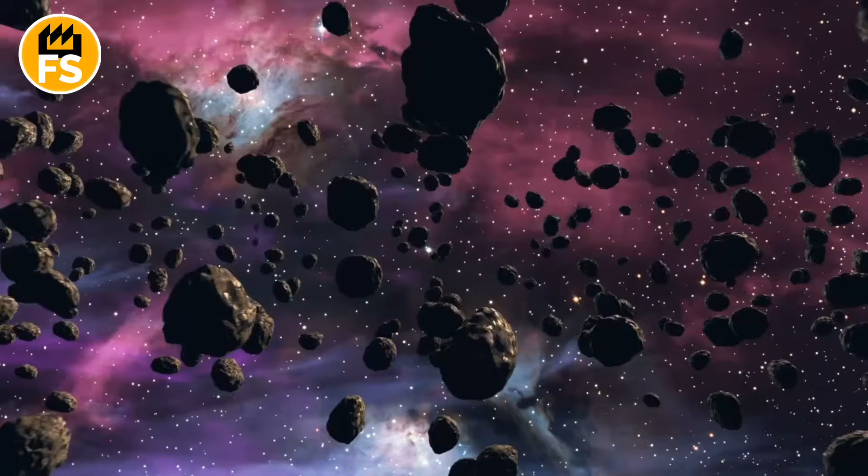Every year, humanity mines nearly 2.5 billion tons of iron ore worldwide. That's over 5 trillion pounds of metal, without which we wouldn't have skyscrapers, roads, or even your smartphone. Iron drives civilization, but few people know where it truly comes from. Because every piece of this metal isn't just ore from a quarry, it's actually a fragment of an ancient star's explosion. And today, you're going to learn something most people don't even suspect.

Stick around till the end. There's a hidden answer there that will completely change how you think about iron.

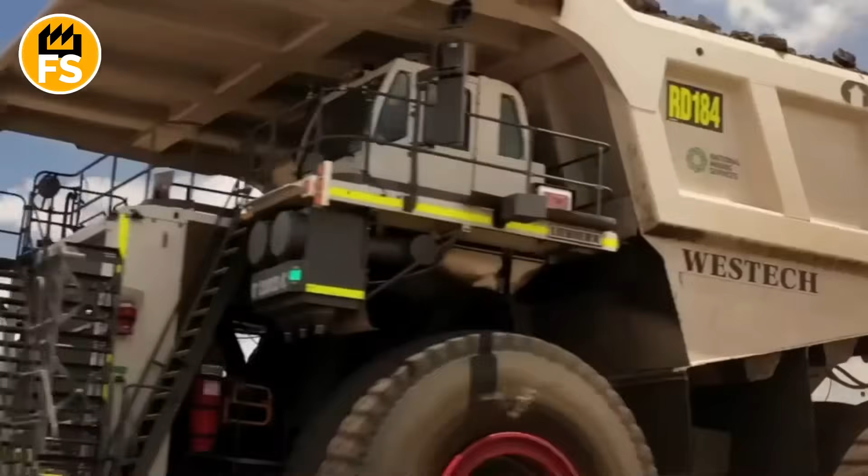The global iron production is an incredibly massive process that drives industrial development and shapes the modern world. Every year, the world extracts nearly 2.5 billion tons of iron ore, or more than 5 trillion pounds. This ore is the primary raw material for steel, without which we couldn't imagine building skyscrapers, cars, bridges, or even modern machinery. The leading iron ore producers are China, Australia, and Brazil.

Australia, for example, mines more than 900 million tons per year, which is roughly 2 trillion pounds, making it the world's largest ore exporter. China, while producing significant amounts of its own ore, is also its biggest consumer, using nearly 1,200 million tons annually for steel production.

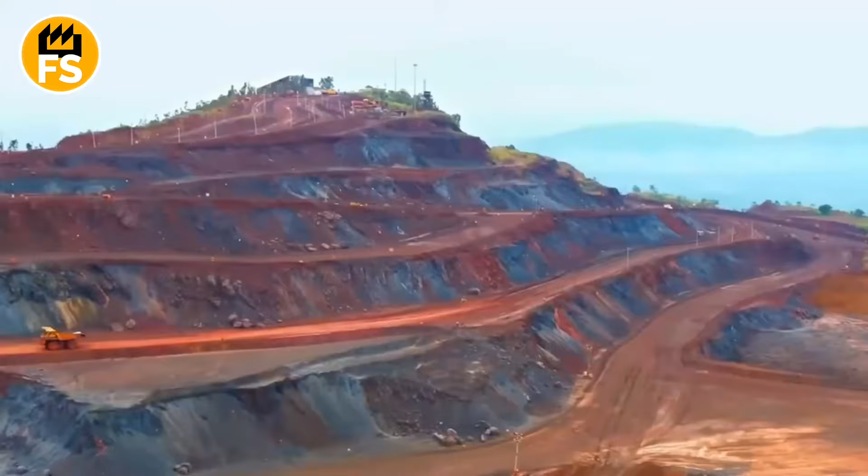Iron ore mining involves massive quarries where giant trucks haul hundreds of tons of ore in a single trip. For example, one modern Australian mining truck can carry over 400 tons of ore at once. That's equivalent to the weight of more than 270 average cars.

The global iron industry keeps pushing forward. Thanks to innovations in extraction technology and reduced energy consumption, production is becoming more efficient and environmentally friendly. Take the United States, for instance. They're implementing new systems to cut carbon emissions in steelmaking, gradually transforming traditional approaches to the industry.

Iron demand is skyrocketing worldwide, especially in developing nations where they're building roads, railways, and massive infrastructure projects at breakneck speed. Simply put, iron is the real engine driving global development, and its production is a powerful indicator of economic strength.

The iron we pull from the Earth's crust has cosmic origins. It was formed in the distant past, long before our planet even existed. Most of the iron in the universe was born in the hearts of ancient stars through processes called nuclear fusion. When a massive star reached the end of its life cycle, it exploded as a supernova, blasting heavy elements, including iron, out into space.

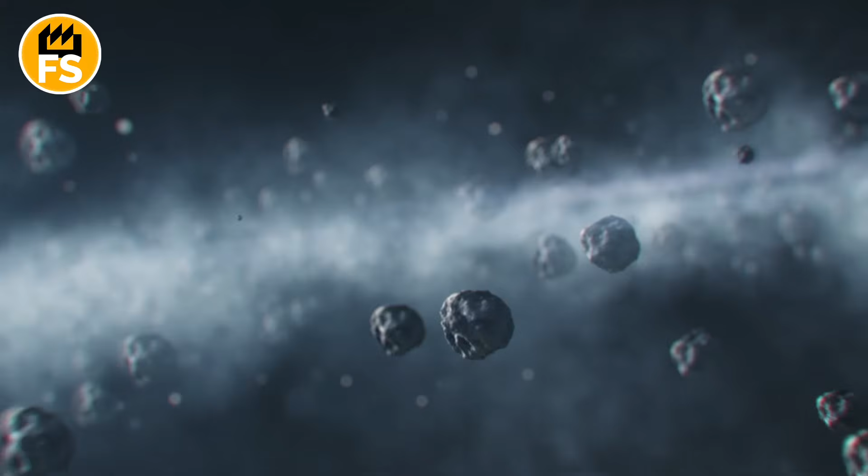This cosmic dust and gas gradually came together over time, forming molecular clouds that eventually compressed into protoplanetary disks. Earth's iron is what remains of these ancient stellar explosions, preserved and woven into the very fabric of our planet. That's why iron is one of the most abundant metals on Earth.

During Earth's formation, over 4.5 billion years ago, the early planet was molten due to intense gravitational compression and frequent meteorite impacts. During this period, heavier elements, including iron, sank towards the center, forming the planet's core. Today, it makes up roughly 1/3 of Earth's total mass, and that's exactly why our planet has its unique magnetic field. The iron core powers this protective shield.

Iron in the upper layers of the planet forms mainly as iron ore, a mixture containing oxides and other iron compounds. It's distributed throughout Earth's crust and mantle, and that's where we extract it from to create metal for every aspect of our lives.

From iron's origins in stars to its crucial role in shaping our planet, this metal has traveled an incredible journey before becoming part of buildings, machines, and even your smartphone. So every piece of iron in the world is essentially a cosmic artifact, carrying within it the history of the universe and our planet's shared story.

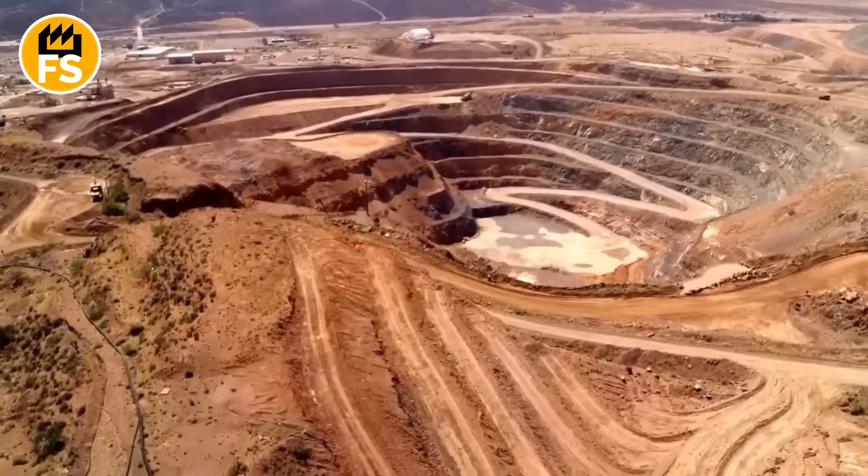Iron almost never occurs in pure form in Earth's crust. It's hidden within numerous minerals, oxides, sulfides, silicates, carbonates, and other compounds. The most common iron minerals are hematite, magnetite, siderite, limonite, and pyrite. The iron content in these ores ranges from 10 to 70% or more, depending on the type and quality of the ore.

To get metallic iron, you need a pretty aggressive and complex technological approach. In industry, the main method is the blast furnace process, where iron ore gets heated in a blast furnace at extremely high temperatures, around 2,900 degrees Fahrenheit. There, under the action of coal and other additives, the ore is reduced, meaning oxygen is separated from the iron, and molten metallic iron forms, which collects at the bottom of the furnace.

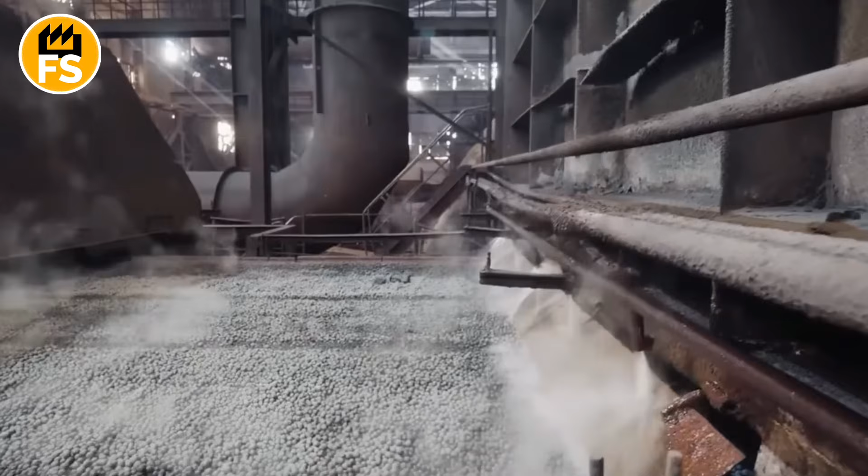Other methods, like direct reduction of iron, are used to extract metal from finer concentrates in the form of iron powder or sponge iron, which can then be remelted.

So, iron gets freed from minerals through engineering processes that demand extreme temperatures and chemical reactions. This aggressive approach is what transforms the iron buried in ores into strong metal, the foundation of modern civilization. The molten metal pools at the bottom of the furnace, separating from the slag, impurities that float to the surface. Pig iron typically contains 3 to 5% carbon and other impurities, so it needs further processing.

The next stage is the converter process. Here, molten pig iron from the blast furnace gets transported to an oxygen converter, where a jet of oxygen further oxidizes excess impurities and carbon. The result is steel with controlled carbon content, maximum 2%, depending on the steel grade.

The molten steel then moves to the casting lines. This is where slabs are formed. Massive flat ingots ranging from about 6 to 12 inches thick and up to several feet wide. A single slab can weigh dozens of tons. These slabs are an intermediate product that's then sent to rolling mills, where they're transformed into flat sheets, strips, or other profiles for future use in manufacturing structures, automobiles, construction rebar, and many other products.

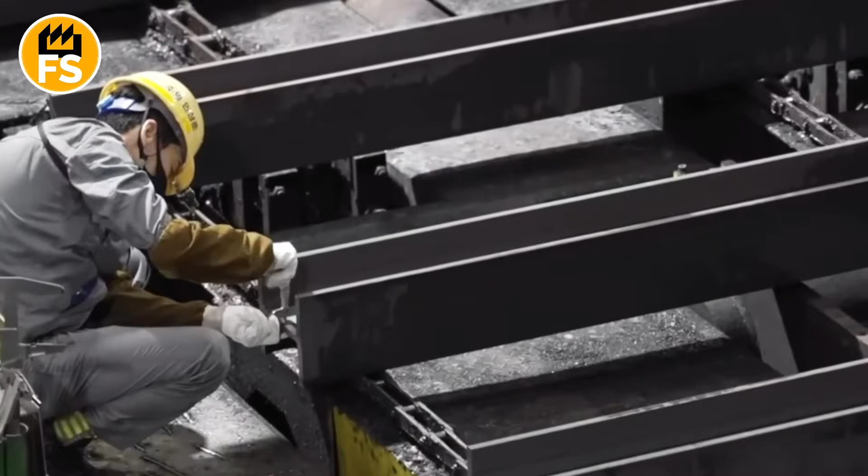It's important to note that this entire technological chain requires high energy intensity and precise control of parameters: temperature, chemical composition, and processing time. Engineers control the process with high precision to achieve the necessary steel quality, strength, and durability.

Besides traditional blast furnace production and converter refining, modern metallurgy increasingly uses electric arc furnaces, where steel scrap is remelted with molten iron, added to save resources and reduce environmental impact. The process starts with loading steel scrap into the furnace, pieces of metal, production waste, or old metal products. To improve steel quality and optimize melting, iron particles or iron concentrates are sometimes added to the scrap metal.

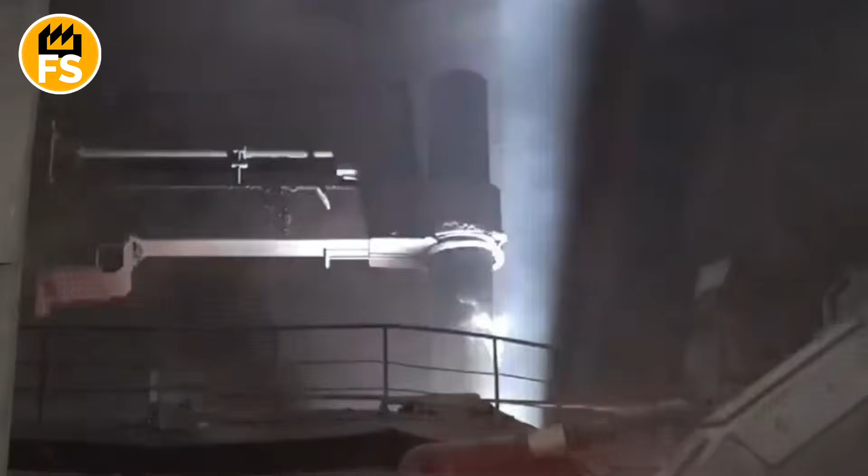After loading, the electrodes lower until they make contact with or get close to the scrap, and current flows through them. An electric arc forms between the electrodes and the charge, reaching temperatures up to 6,300 degrees Fahrenheit. Heating the charge under the arc's influence causes the scrap metal to melt rapidly. The molten steel forms a pool of liquid metal that mixes intensively thanks to electrodynamic vibrations and natural convection. This ensures uniform heating and metal composition.

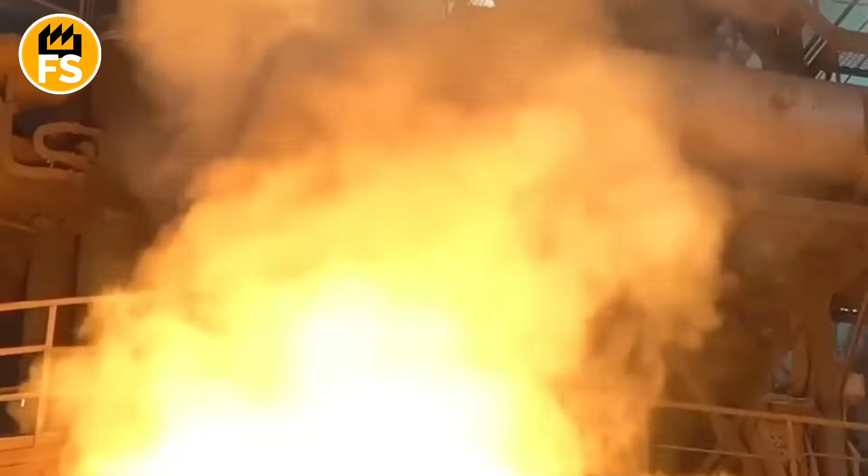To purify the molten steel from unwanted impurities, oxygen is introduced into the furnace through special tuyeres. The oxygen oxidizes carbon, sulfur, phosphorus, and other harmful elements, forming slag that's easily removed. Alongside this, fluxes are added, materials that help neutralize impurities, improve slag formation, and protect the metal from air exposure. Refining continues until the desired chemical composition is achieved.

When the metal reaches the required quality and temperature, it's poured from the electric arc furnace into special ladles, containers for transporting liquid steel to the next processing stages. On continuous casting lines, the molten metal is transformed into slabs. The weight of a single slab can reach anywhere from 20 to 30 tons. These billets serve as the foundation for further rolling into sheets, bars, pipes, and other metal products.

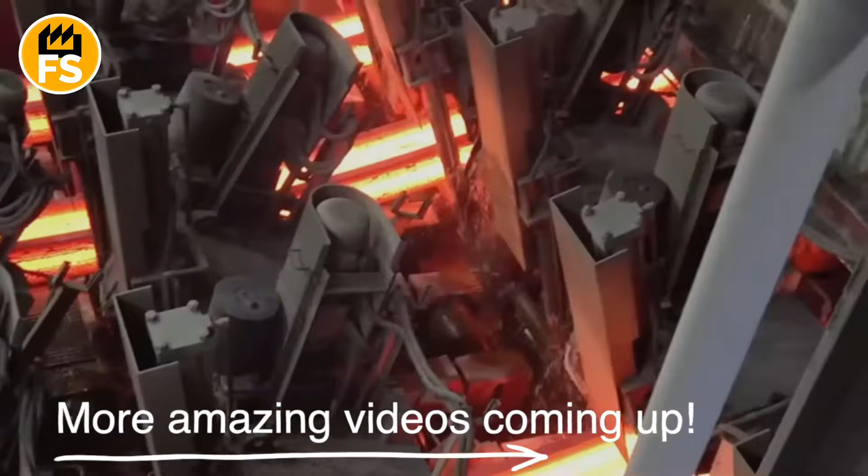The main advantage of electric arc furnaces is that they can run almost entirely on scrap metal, which dramatically cuts down the need for mining iron ore and slashes energy consumption. This makes steel production way more eco-friendly and cost-effective. The furnace is constantly monitored by operators who adjust the current strength, voltage, and oxygen flow to optimize melting and hit the exact steel specs needed. Graphite electrodes wear down over time from the extreme heat and need to be replaced regularly.

Every 3 seconds worldwide, a new engine block rolls off the production line. The heart of a car that will withstand millions of explosions, temperatures over 4,600 degrees, and operate for decades without stopping. But how do you transform molten metal into a perfect mechanism with precision down to a micron? One mistaken dimension, and the engine will tear itself apart within minutes of operation.

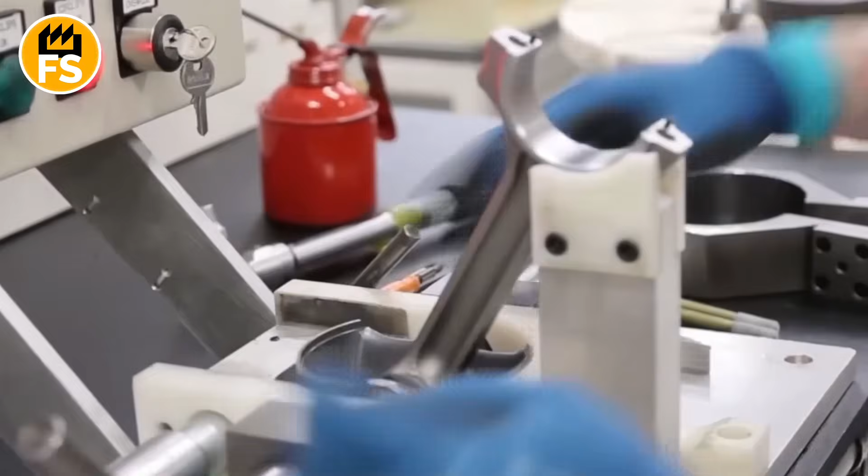Let's start by understanding what an engine block actually is. It's the foundation that holds the entire engine together. Inside it are the cylinders where fuel combustion occurs, pistons that move up and down, and other critical components. The engine block must be strong, lightweight, and resistant to high temperatures. That's why manufacturing it is a complex process that demands precision and advanced technology.

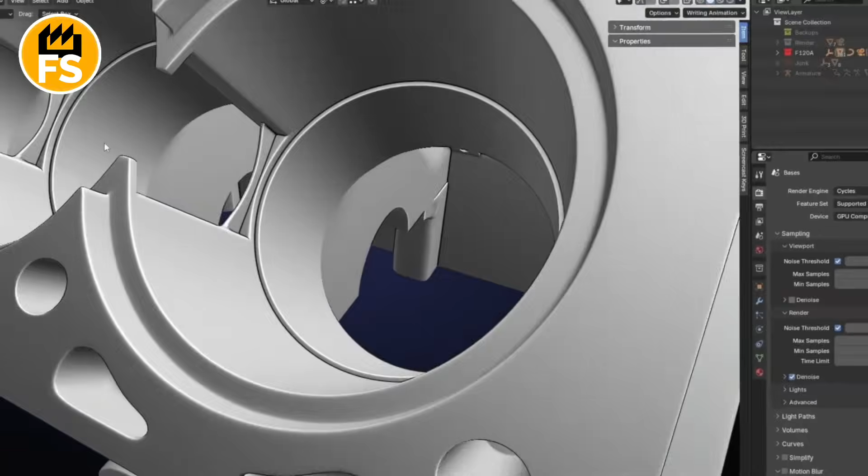Everything begins with an idea. Engineers develop a concept for an engine that must be powerful, economical, and environmentally friendly. They use specialized 3D modeling software to create a digital model of the block. This allows them to account for every detail and test how the engine will perform under various conditions. Engine blocks are made from different materials, but the most common are cast iron and aluminum. Cast iron is strong and resistant to high temperatures, but heavy. Aluminum is lighter and dissipates heat better, but less durable.

Sometimes composite materials or alloys are used to combine the advantages of both metals. After the engineering team completes all calculations, computer modeling, and finally approves the design of the new engine block, the true heart of the future automobile, the most interesting part begins: its birth in metal.

The first and perhaps oldest step in metallurgy is casting. A massive shop filled with the hum of machinery, the smell of molten metal, and the glow of high temperatures. This is the foundry, where engineers' dreams become real components. First, a mold for the block is created. There are two main approaches to creating these molds, each with its own advantages.

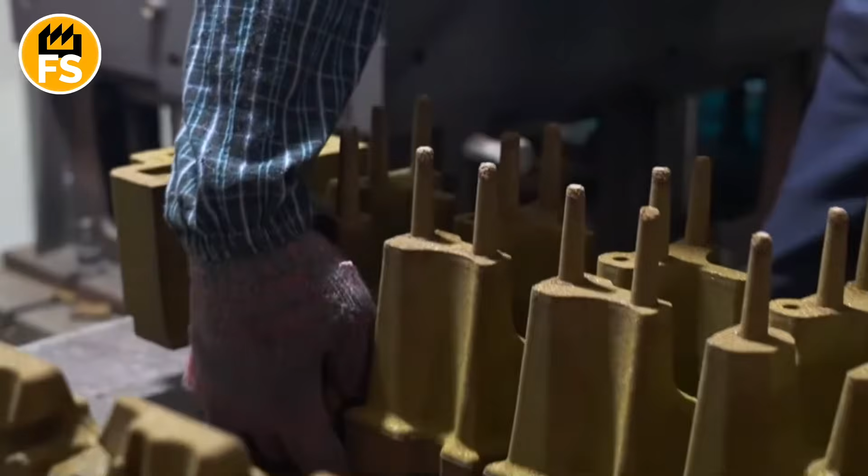The first, and most common for large-scale production, uses sand molds. This is an amazing, though traditional method. First, they make a pattern of the future engine block, usually manufactured from wood or metal, and it's an exact copy of the block, but accounting for certain features, such as compensation for metal shrinkage during cooling.

Then this pattern is placed in a special container, where it's tightly packed with a mixture of quartz sand, clay, and organic binding agents. This mixture is compacted, then baked or chemically hardened, creating a strong but porous mold. After this, the pattern is carefully removed, leaving a cavity that precisely matches the shape of the future block.

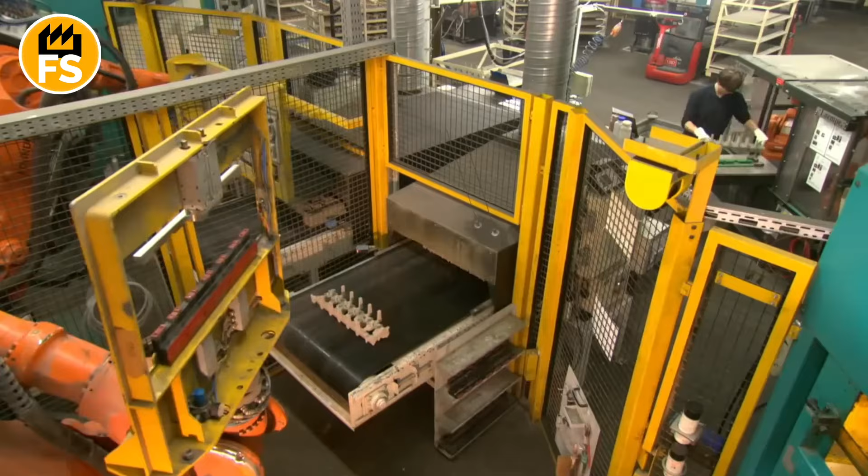The most challenging aspect of sand molds is creating internal cavities, coolant channels, oil passages, cylinder bores. For this, they use so-called cores, separate elements, also made from sand, that are inserted into the mold. After pouring the metal and cooling, the sand is easily removed, leaving the necessary internal channels.

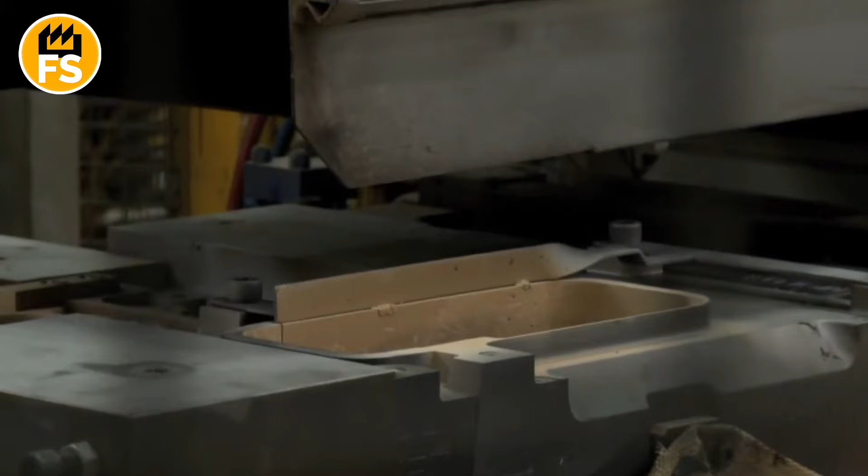The advantage of sand molds is their relative affordability per unit at large volumes and the ability to create very complex internal geometries. The second method, often used for aluminum blocks or smaller production runs, uses metal molds or permanent molds. These are stronger, reusable molds made from steel or cast iron. They're more durable and allow for parts with smoother surfaces and higher dimensional accuracy right from the casting stage.

However, metal molds are much more expensive to manufacture, and it's harder to adapt them for creating the very complex internal channels found in engine blocks. Therefore, they're often combined with sand cores for internal cavities.

This process includes precise control of chemical composition. Metallurgists add special alloying elements, such as silicon, magnesium, copper, in strict accordance with the recipe to give the future block necessary properties: strength, wear resistance, lightness. The molten metal is constantly stirred and goes through refining processes to remove unwanted impurities that could reduce the quality of the finished part.

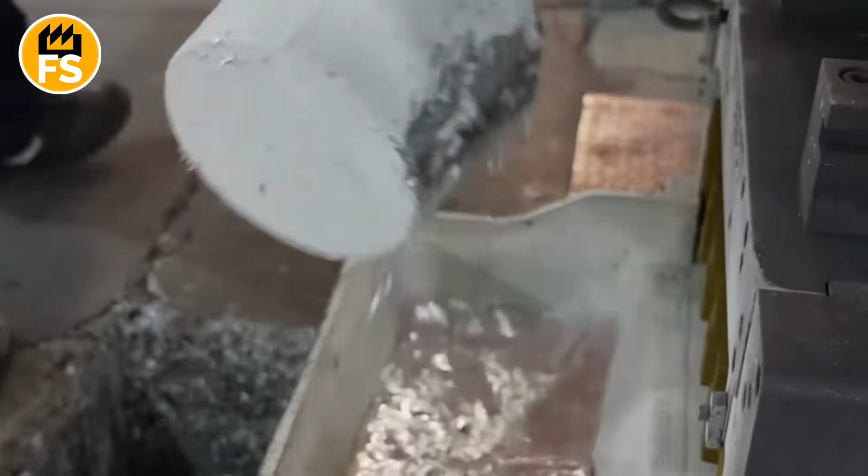Finally, the climax arrives: pouring. The molten metal, radiating intense heat, is carefully transferred from the furnace into special ladles, then into the prepared molds. This is the moment of maximum concentration and precision. The metal must fill every cavity of the mold, displacing air and completely matching its configuration.

The pouring process can be gravitational, meaning the metal simply flows under gravity, or under pressure, which ensures better mold filling and reduces porosity. After pouring, the mold remains for some time, so the metal can cool and solidify. This can take from several minutes to several hours, depending on the block size and metal type.

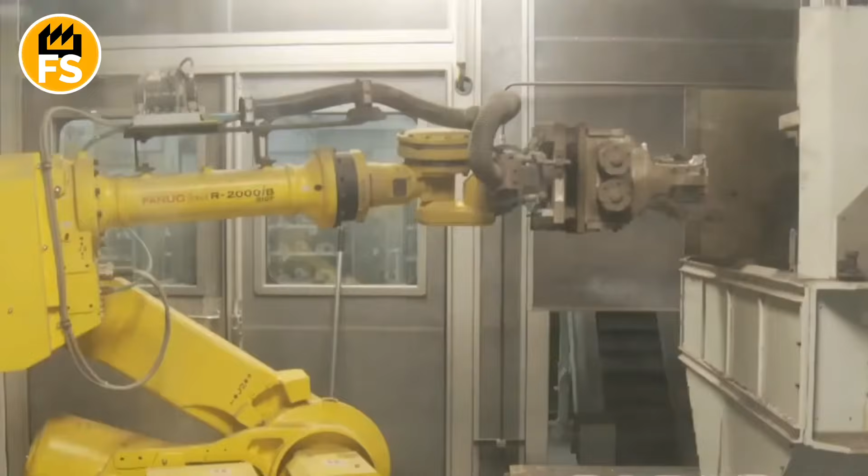When the metal has cooled and fully crystallized, the next stage occurs. The mold is broken apart. If it's a sand mold, it's simply destroyed using vibration or hydraulic hammers, freeing the newly created metal object. The sand is later collected and partially recycled. If it's a metal mold, it's opened and the finished block is carefully extracted.

As a result of this process, we get what's called a rough engine block. It's not perfect yet. Its surface is rough, it may have sand residue or so-called flash, small metal overflows at the mold seams. It doesn't yet have mounting holes and it lacks the micron tolerances required for engine operation.

But it's already a real block, massive and heavy if it's cast iron, or surprisingly light if aluminum, but already with a clearly defined shape, ready for the next processing stages that will transform it into a high-precision part capable of withstanding incredible loads inside the engine.

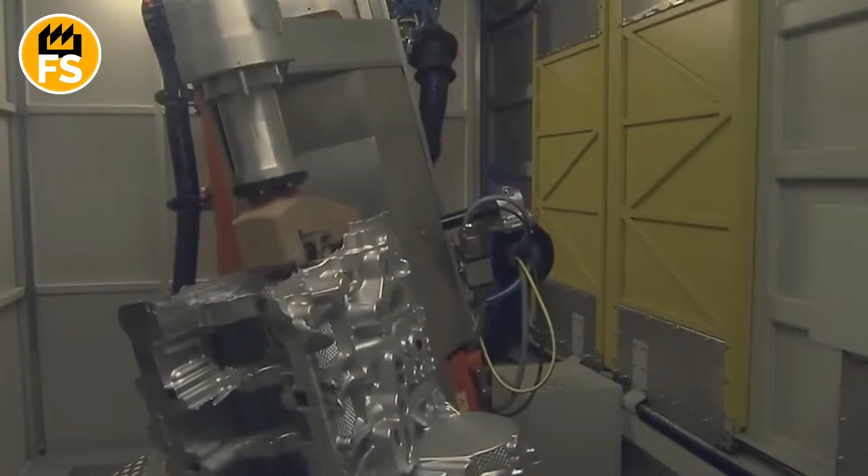Mechanical processing is performed on specialized computer numerically controlled machines. The large, solid block is secured on a special table. Around it, various tools move, performing their work. Like a scene from some movie, isn't it?

Let's start with the most obvious: cylinder bores. These holes must be perfectly round, have precise diameter, and be positioned exactly on one axis, since pistons will move within them. First, machines use large end mills to roughly remove material, creating preliminary holes. It's like carving out a large chunk from cheese.

Then more precise tools come into play. Special boring cutters are used, which carefully remove the thinnest layers of metal, bringing cylinder diameters to the required size. This happens in stages, with constant dimension control.

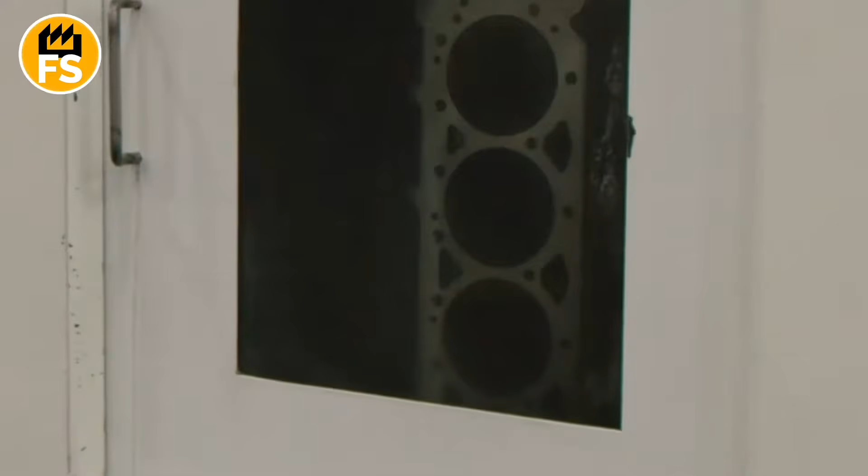After this, cylinder walls undergo honing. This is final abrasive processing that creates very fine, cross-hatched scratches on the internal surface. These scratches retain lubricant, ensuring perfect lubrication of piston rings and minimizing friction, which is critically important for engine efficiency and longevity. Actually, the cylinder surface after this processing feels perfectly smooth to the touch, but under a microscope has the perfect structure for retaining an oil film.

Next, oil and cooling channels. These systems that penetrate the entire block are vitally important. Oil channels deliver lubricant to all moving engine parts, such as the crankshaft, camshaft, pistons, ensuring their lubrication and heat removal. Cooling channels circulate coolant, removing excess heat generated during fuel combustion and maintaining optimal engine operating temperature.

The internal, complex labyrinths of coolant and oil channels, as we mentioned, are formed during the casting stage using sand cores. But after this, they need to be opened and brought to perfect condition. For this, high-precision drills and mills are used to create inlet and outlet openings for these channels, and also connect them with other engine parts. Each hole must be positioned with millimeter, or even micron precision, so fluids can circulate freely.

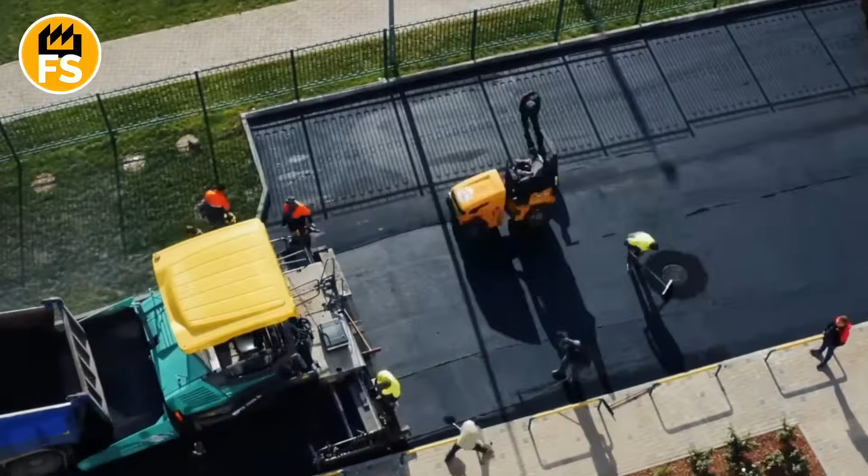In every country, asphalt is just a road. But in Dubai, it's a challenge to nature. Here, air temperatures reach 122 degrees in the shade, while the road surface heats up to 160. Regular asphalt would melt within just a few days, but engineers found a way to make it survive. Polymers that hold their shape even at 176 degrees, geotextile membranes that breathe, and sensors that detect defects before human eyes can spot them. Why don't these roads melt like ice in the sun?

And what strange technology did they test to make them actually dry after rain? Watch till the end. The finale will surprise you.

Standard asphalt consists of stone aggregate and bitumen, a dark, thick substance that holds the mixture together, making it uniform and strong. However, bitumen has one weakness. It starts to soften at temperatures around 113 degrees Fahrenheit. For countries with moderate climates, this isn't a problem since road surfaces rarely reach such heating levels. But Dubai has completely different conditions.

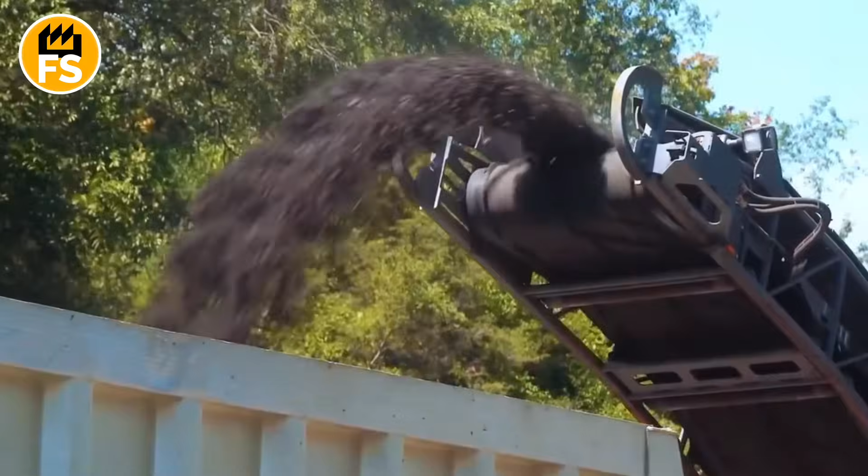There, summer air can heat up to 122 degrees in the shade, while the road surface under direct sunlight can reach 160 degrees. Under such conditions, regular asphalt would literally behave like warm rubber. It would become soft, start deforming under vehicle weight, and in places simply slide off slopes. Plus, sharp temperature changes between scorching days and relatively cool nights would cause cracks to appear.

In countries where occasional short heat waves occur, people might not immediately notice these processes. Sure, we sometimes get 104 degrees in summer, but such temperatures don't last long, and the surface deteriorates slowly, gradually. In Dubai, however, high temperature isn't just present, it's constant and stable for several months. This means asphalt is under continuous stress, and if you don't account for this factor, the road literally won't survive.

That's exactly why engineers had to find a solution that would allow asphalt to maintain its shape even under extreme heating conditions. They replaced regular bitumen with modified bitumen, with polymer additives that change its physical properties. Such bitumen holds its shape at temperatures up to 176 degrees Fahrenheit. This means even when the road surface heats up to maximum levels, the material still remains stable, doesn't flow, and doesn't change structure.

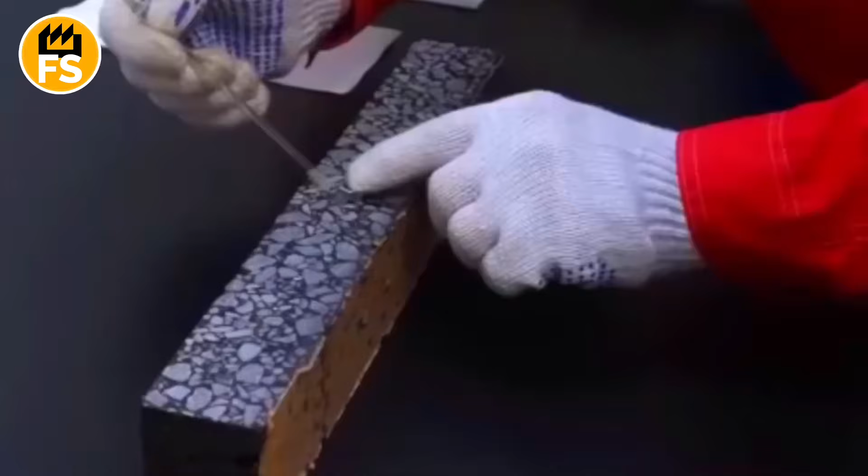The difference might seem small at first glance. What's a few dozen extra degrees? But this exact difference makes Dubai's roads smooth, even, and durable, even when it's almost impossible to breathe from the heat around you. So what is this modified bitumen?

The process is based on mixing bitumen with polymer additives. Polymers act like a reinforcing network at the molecular level. They strengthen the bitumen structure, making it more elastic and heat-resistant. As a result, the asphalt doesn't soften. It maintains stability and shape even when heavy bus or truck wheels press on it for hours.

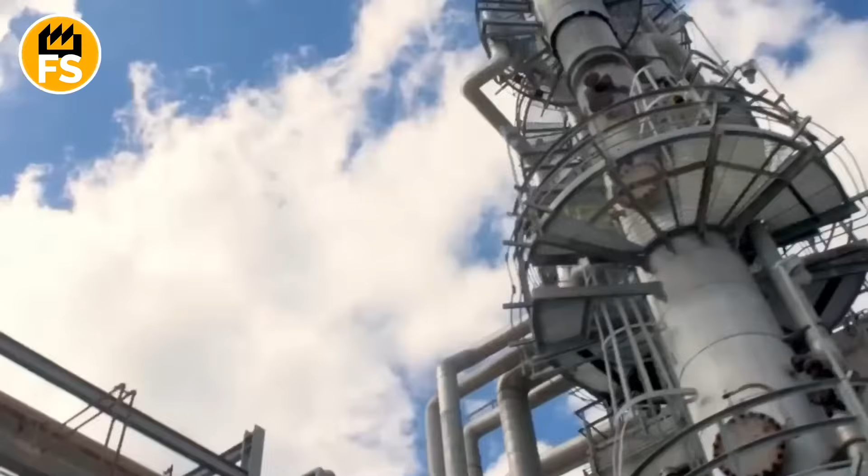The mixing process also isn't limited to just adding polymers. It's crucial to properly select the stone aggregate composition. Stones of different sizes create a framework-like structure, and bitumen here acts not as the main material, but rather as what connects the elements together. If the aggregate is selected incorrectly, bitumen will have to take on too much load, and even the modified mixture will lose stability. Therefore, asphalt composition is always a precise calculation of material ratios that don't just connect, but work as a unified system.

But asphalt is just the surface. Hidden beneath it is a multi-layered sandwich that determines the road's durability. The first layer is sand, but regular sand won't work. It's mobile, can shift, and the road would lose its evenness within months. So sand is stabilized by mixing it with cement or special substances that make the mixture less mobile. Next comes a crushed stone layer that provides hardness and distributes load. Special geotextile fabrics can be laid between layers, preventing settling and material mixing.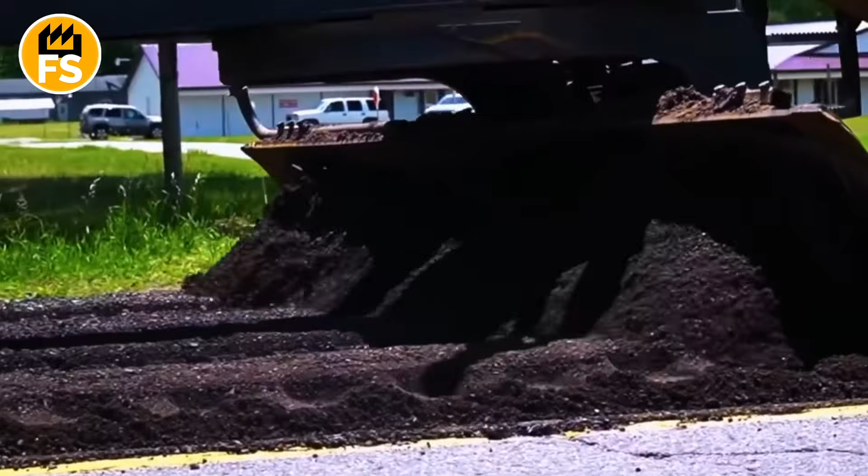Geotextile works as a membrane that allows water to pass through, but doesn't let soil particles mix. This keeps the construction stable for many years. The way asphalt is actually laid also plays an important role. Work is usually done at night when temperatures are lower. This is necessary so bitumen cools evenly and gains the required hardness.

If you lay asphalt during daytime heat, its surface will cool unevenly, creating stress in the structure that will eventually lead to microcracks. After laying, roads are regularly checked using special machines equipped with sensors and thermal imaging cameras. If sections are found where temperature is too high or irregularities appear, they're repaired immediately, not waiting until the problem becomes visible to drivers.

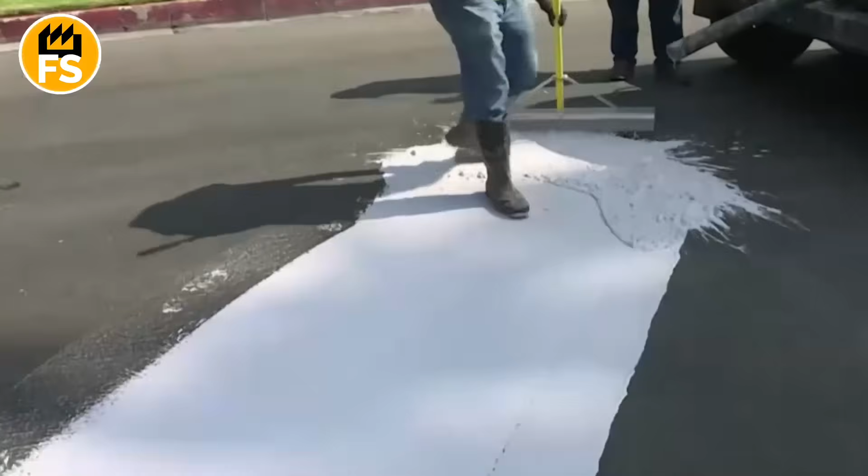Experiments with cooling coatings deserve special mention. In some districts, asphalt is painted or covered with a special compound that reflects sunlight and reduces surface heating by 10 to 15 degrees. This is important in pedestrian areas since road surface temperature affects how hot the air gets at foot level. This way, even a regular walk becomes less exhausting.

In Dubai, roads aren't left unattended until large potholes appear. Control happens constantly and systematically. Special vehicles with measuring equipment travel highways and city streets, recording the smallest irregularities. Sensors read surface deviations, and computers compare them to standards. If there's suspicion of overheating or beginning deformation, the section is checked with thermal imaging cameras.

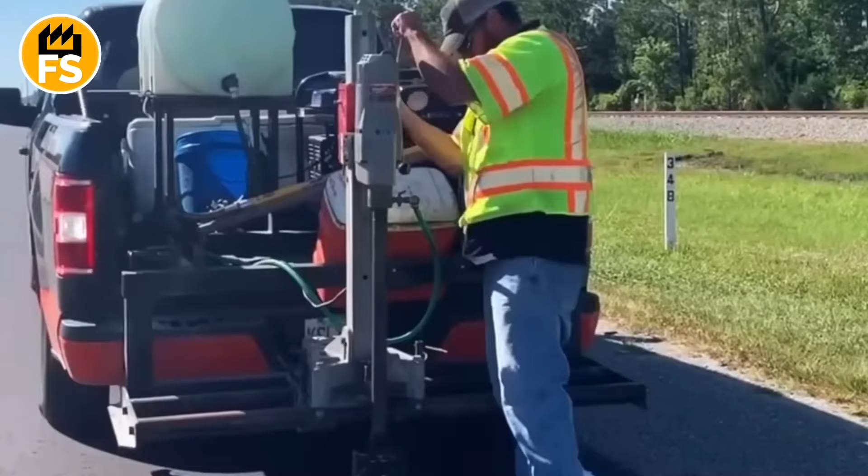High temperature indicates that bitumen is losing rigidity, and the surface might start settling. Thanks to such monitoring, repairs are done not when it's too late, but when the first changes begin. Repair work is conducted mainly at night when temperatures are lower and material cools evenly. This extends the road's service life and avoids repeated damage. The approach is based on the idea that infrastructure should work continuously, not wait for the moment when it becomes a problem for drivers.

According to Dubai municipality data, after switching to polymer-modified mixtures, the number of deformation waves on roads decreased by approximately 40% during the first 2 years. Meanwhile, road surface service life increased on average from 7 to 10 years to 12 to 15 years before the first major repair. This significantly reduces overall infrastructure costs. Although initial polymer asphalt installation costs are higher by approximately 15 to 20%, long-term savings can reach 50% due to reduced repair needs.

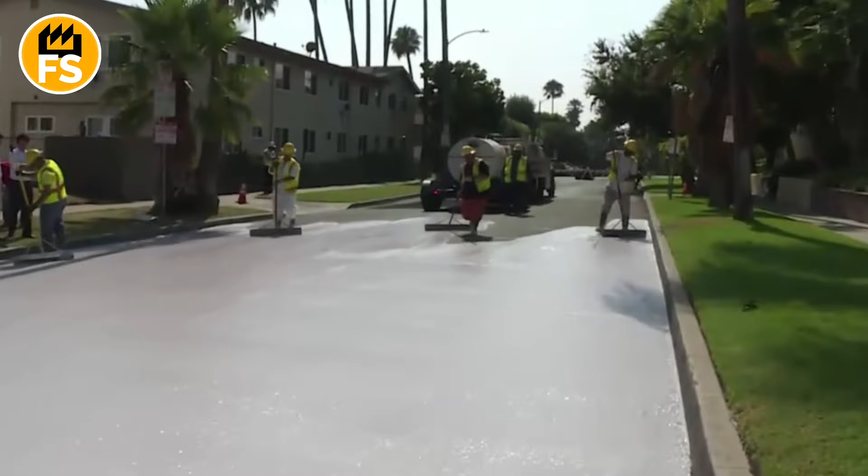There's also data on experimental light reflective coatings being tested in residential areas and near pedestrian zones. On average, such coatings reduce road surface temperature by 10, or even 15 degrees, depending on conditions. According to observations, in areas with cooling roads, air temperature at pedestrian foot level also drops by 2 to 3 degrees, reducing thermal load on people and making outdoor stays more comfortable.

Statistics also show that, with early detection of surface microdefects, their elimination takes on average 3 to 6 hours, while if you wait for visible damage to appear, repairs can last from several days to several weeks and require closing road sections. Therefore, the city focuses on regular monitoring. In 1 month, control vehicles can cover over 80% of the city's road network.

Dubai once tested asphalt that absorbs solar energy, then radiates stored heat at night to dry roads faster after rare rainfall. Turns out, the surface works like a giant thermos. During the day, it accumulates energy, and at night gradually releases it. The experiment showed such roads can dry 30% faster.

And this is really needed, because after desert rain, water doesn't absorb into the ground, but can stand on asphalt for hours or even days. So the technology solves a problem that doesn't even exist in most countries. You know how this experiment ended?

Imagine construction that's not just strong, but super lightweight, durable, and eco-friendly all at once. That's exactly the revolution that fiberglass rebar represents. A modern material that's gradually replacing traditional steel reinforcement in countries around the world. China is especially aggressive in producing it, a giant controlling a massive chunk of the global market.

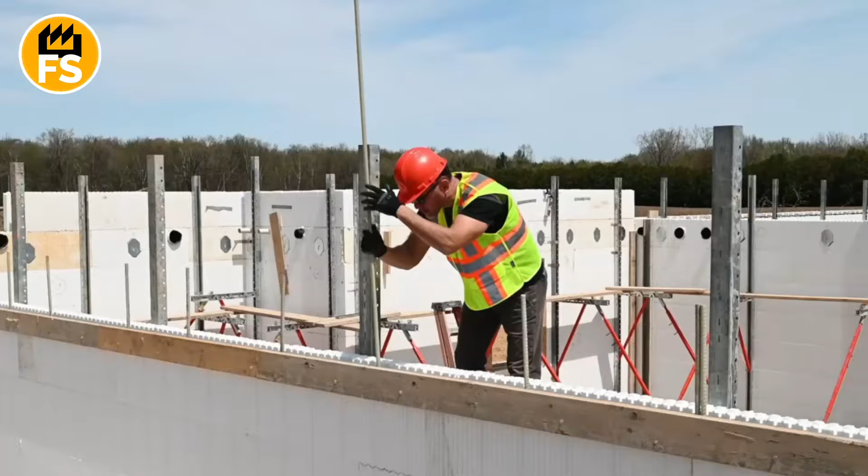But what is this secret material that's changing the game? And why does geopolitics play just as big a role here as technology? Let's dig in. Fiberglass rebar consists of reinforcing rods made from a composite material based on fiberglass soaked in special resins. Unlike traditional steel rebar, it's 4 to 5 times lighter, doesn't rust, resists corrosion, and holds up under harsh conditions. Think acid rain, salt spray, and high humidity.

To put it in perspective, standard steel rebar weighs close to 1 pound per foot of length, while fiberglass rebar weighs about 1/4 pound for the same size. This means it's easier to work with, requires less spending on transportation and installation, which makes construction faster and cheaper. China plays a leading role in global fiberglass rebar production.

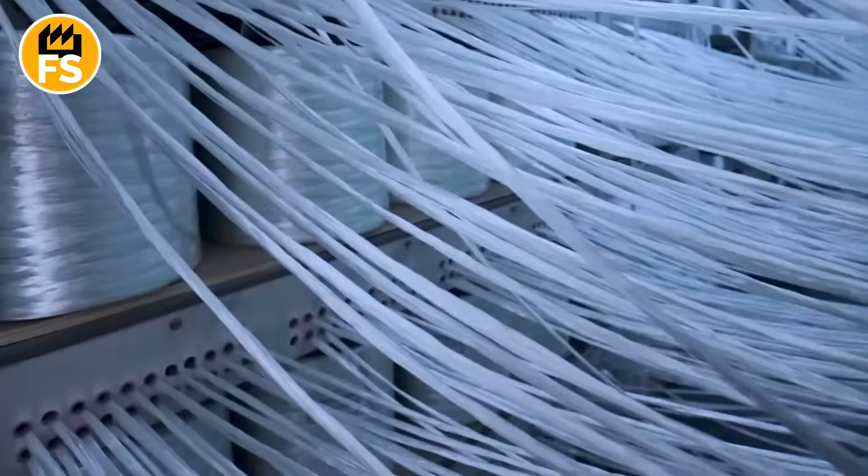Factories, located mainly in the eastern and central regions of the country, are equipped with modern pressing, forming, and fiberglass polymerization lines. Chinese companies produce over 500 million pounds of these materials annually, with exports accounting for roughly 60% of total global volume. China's huge advantage lies not only in scale of production, but in price. Thanks to low electricity and resource costs, Chinese products are often cheaper than competitors from the USA and Europe.

But this is already triggering intense geopolitical discussions. If you look at the bigger picture, fiberglass rebar has become a real hot potato in global trade. Western countries increasingly face a dilemma: support domestic production with significantly higher costs but less export influence from China, or actively import cheap Chinese rebar, becoming dependent on Chinese materials.

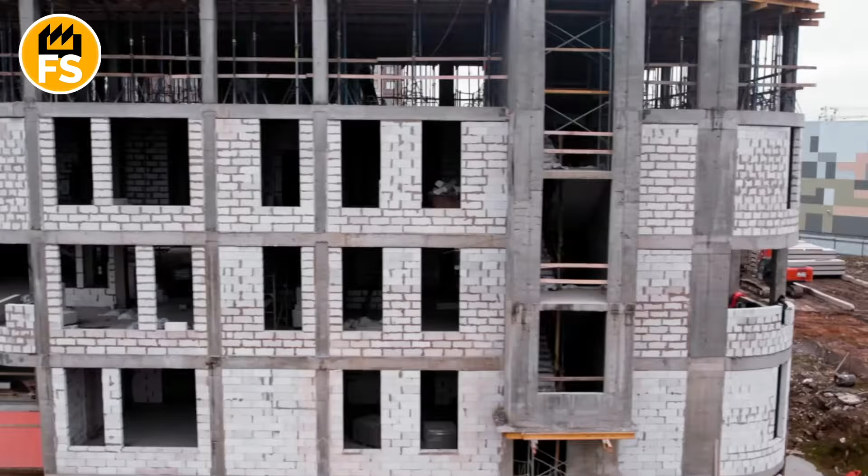The secret aspect is this: China uses fiberglass rebar not only in its own massive infrastructure projects. Through strategic investments in countries across Asia, Africa, and Latin America, Beijing actively promotes this material through its global construction corporations working within the Belt and Road Initiative. This allows China to not only increase its presence in the global construction market, but also strengthen economic influence in regions through control over construction resources.

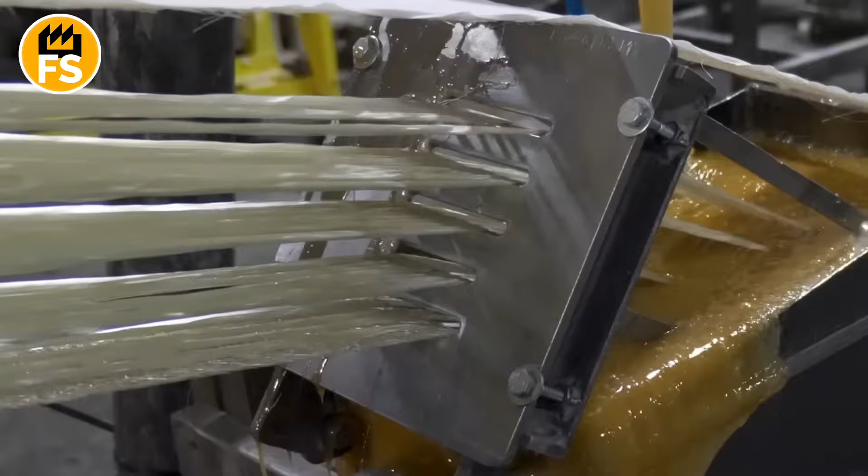The trend of using fiberglass rebar isn't just about savings or new materials. It's about ecology and safety. Fiberglass rebar is rapidly gaining popularity in the USA, where the number of bridges, roads, and buildings constructed using lightweight composites is growing. Unlike metal, this material doesn't corrode, so infrastructure becomes more reliable and durable. According to reports from the American Association of Building Materials, on average, the cost of construction using fiberglass rebar drops by 20%, and the service life of structures doubles. For young engineers, architects, and entrepreneurs, this means more opportunities for innovation, reduced environmental impact, and industry growth.

If you're building a bridge or a high-rise, instead of heavy steel rebar, you use thin fiberglass rods. They can be longer, lighter, and simpler to install. Plus, you don't have to worry that after years, they'll start rusting and causing concrete deterioration.

China is already actively using its fiberglass rebar on huge construction sites. In the capital districts of Beijing, Shanghai, and Guangzhou, they're installing new highways and bridge crossings using these materials. Around the world, Chinese companies supply this rebar for projects in the USA, Europe, and Middle Eastern countries, strengthening their technological and economic presence. Everything starts with glass, the raw material for making fiberglass.

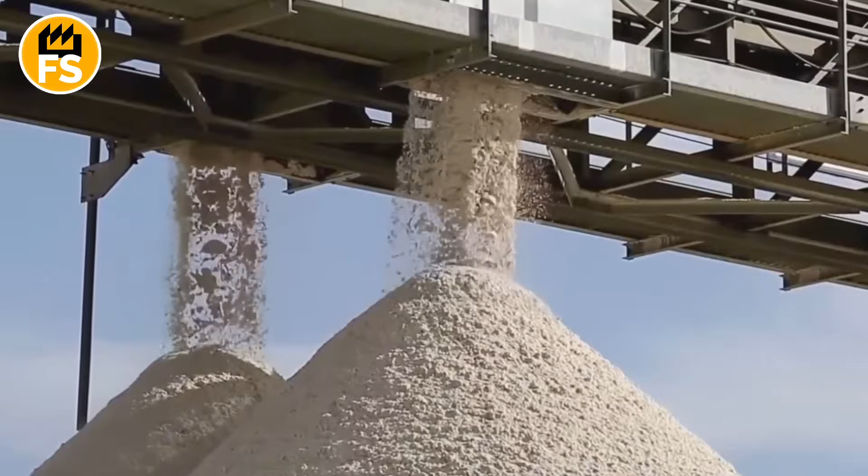Glass is made from a mixture of sand, limestone, and soda. These ingredients are sent to large furnace ovens, heated to temperatures of 2,700 degrees Fahrenheit. Here, the mixture melts, forming liquid glass. Then the molten glass passes through special openings called spinnerets, forming thousands of thin threads. These fibers are cooled and collected into bundles. This creates primary fiberglass: thin, flexible, and strong threads.

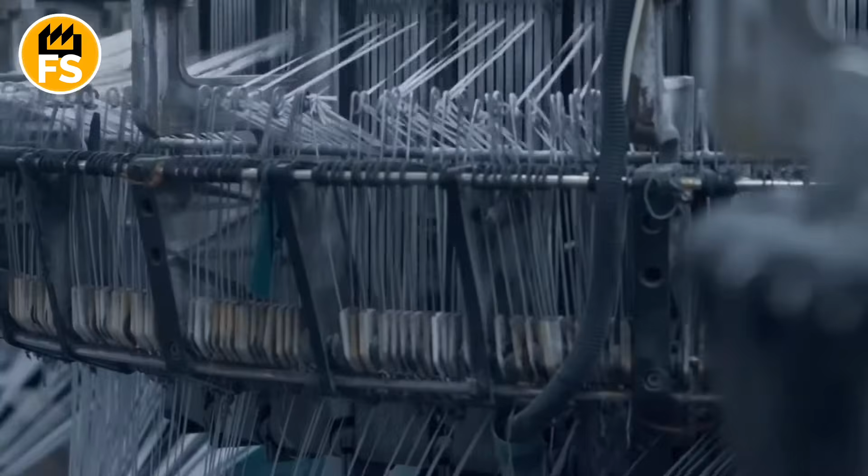To give the fibers necessary properties, they're treated with a special chemical solution, an organic binder or silane. This coating ensures strong adhesion between the fiberglass and the polymer matrix that will follow. The treated threads are collected into bundles that can contain thousands of individual fibers. These fibers are oriented parallel to each other for maximum strength.

Next comes the main stage, forming the composite matrix. The raw material for this is polymer resins, usually epoxy, polyester, or vinyl, which have high strength characteristics and provide resistance to moisture and chemical effects. The fiberglass bundles are dipped or soaked in the polymer resin solution. The fibers are evenly coated with polymer, and excess is removed so there are no lumps and irregularities.

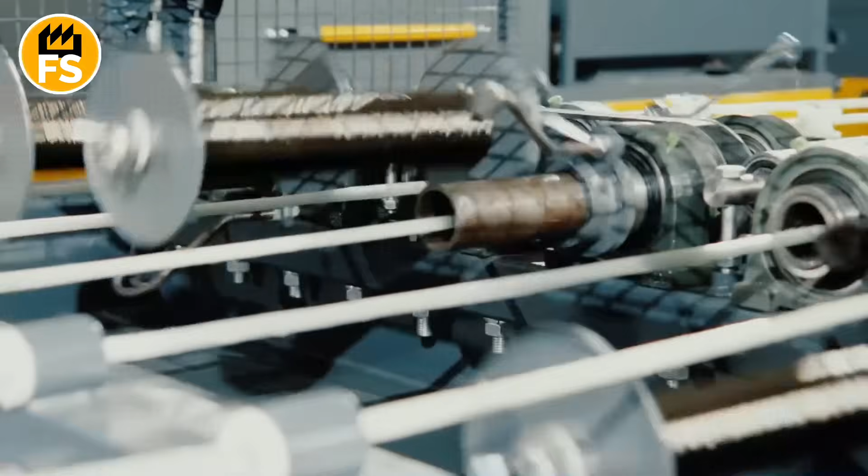The prepared wet bundles are fed into a special forming line, an extruder. Here the molten composition is pushed through forming openings, giving it the shape of a rod or bar of the required diameter. Then comes an important operation: drawing and polymerization. The finished reinforcing rods are immediately sent for cooling and hardening in special thermal chambers. Here, the polymer matrix solidifies, firmly binding the fibers into a single structure.

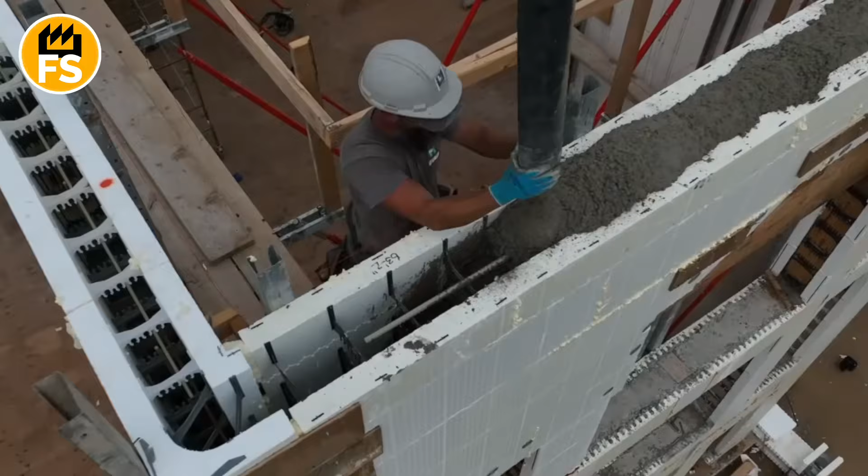Size and shape control is very important, so production lines are equipped with automatic calibration systems to ensure the specified diameter and round shape of the rebar. Standard fiberglass rebar diameter can range from 1/4 inch to 1.5 inches, depending on the application. To ensure better adhesion to concrete, the rebar isn't left completely smooth. During production, an action occurs through forming rollers that creates ribs, notches, or texture on the surface. This makes fiberglass rebar more effective for reinforcing concrete structures. It holds firmly in the concrete mass and doesn't slip under loads.

At the end of the production line, workers or automation cut the reinforcing rods to standard lengths, usually 20 feet or 40 feet. The rods are packed in bundles that are convenient to transport and store. Each batch of products undergoes testing for strength, flexibility, and corrosion resistance. Manufacturers often provide warranties for rebar service life of over 50 years, which is several times longer than the service life of ordinary metal reinforcement. Fiberglass rebar is gaining increasing importance in modern construction thanks to its lightness, strength, and corrosion resistance.

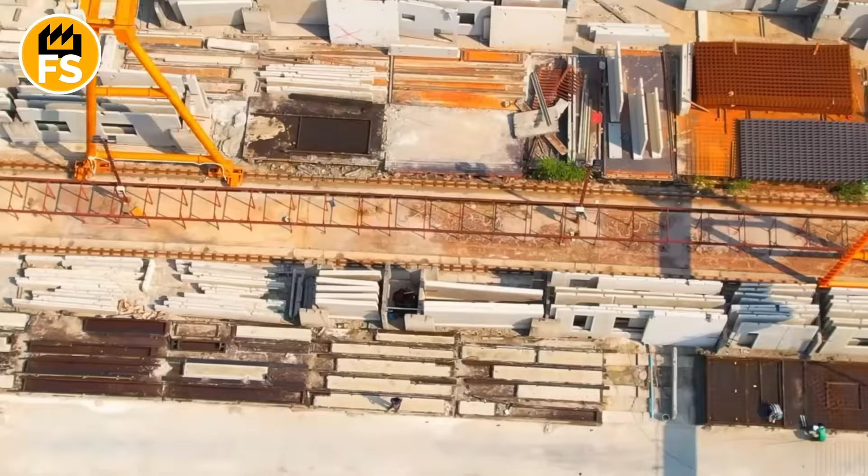Jizan Flood Mitigation Channel, Saudi Arabia, the world's largest project using fiberglass rebar, involving reinforcement of long channels for flood control. Over 11 million meters of fiberglass rebar were used here, designed to ensure high resistance to harsh environments.

Muskrat Falls Hydroelectric Project, Canada. Rebar manufacturers supply material for reinforcement that guarantees a long service life for the hydroelectric station, especially in conditions of contact with water and high humidity.

Sunshine Skyway Rest Area Seawall, USA, Florida. Marine structures where fiberglass rebar is the ideal material due to corrosion resistance in salt water. Here it reduces the need for repairs and extends the service life of the walls.

Alligator River Bridge, USA, North Carolina. A bridge reinforced with composite rebar to increase durability and minimize the weight of metal structures. Canadian Tunnels. Toronto TTC North Subway Extension, a project where fiberglass rebar helps increase structural flexibility and reduce damage risks during seismic movements.

Every year, humanity produces over 360 million tons of plastic. Most of it doesn't disappear. It decomposes over hundreds of years. But what if instead of oil, we could make plastic from sugar? In the very heart of Thailand grows a crop that can change this.

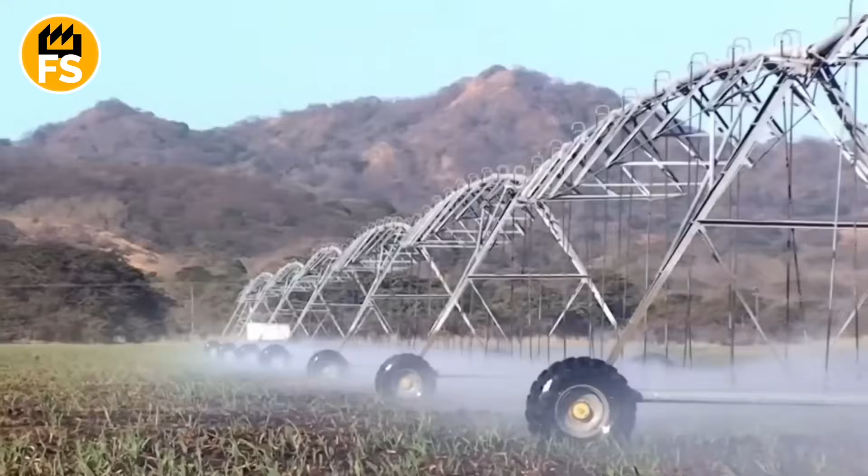Cane isn't grown from seed. It's propagated through cuttings, pieces of stems that have nodes with buds. They're planted in prepared soil, usually in furrows, at a depth of 2 to 4 inches. After a few days, the buds sprout and new shoots begin to form. This plant is very light-loving, so plantations are located in open areas. It needs lots of water, but doesn't like stagnation, so irrigation must be moderate and regular.

Over 10 to 14 months, the cane grows to 7 to 14 feet tall. Its stems are thick, juicy, filled with sweet juice. It's in this juice that sucrose is contained, the basis for sugar production. During growth, the cane actively absorbs carbon from the atmosphere, converting it into organic substances. This makes it not only a source of energy, but also a natural absorber of greenhouse gases.

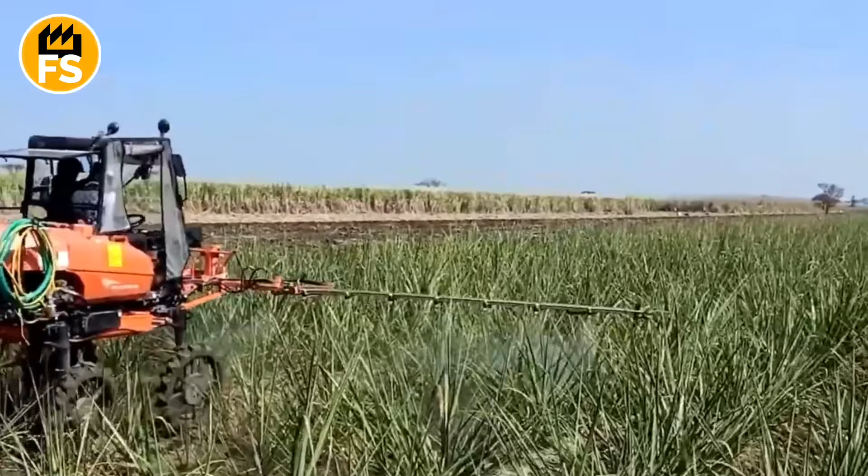Sugarcane is harvested when it reaches maximum sucrose concentration, usually 10 to 14 months after planting. In Thailand, the harvest season falls during the dry period, from December through March, when the plant is no longer growing, but accumulating sweet juice. In many regions of Thailand, manual harvesting is still used. It's hard work performed by experienced workers with machetes.

Before this, the plantation is often burned to remove leaves and ease access to the stems. Although this simplifies the process, burning harms the environment, so more and more farmers are switching to green cane. Harvest without fire. Large farms use mechanized combines that cut, clean, and chop the cane right in the field. This is faster, more efficient, and more ecological, though it requires investment.

Important: cane residues, bagasse, aren't thrown away. They're used as biofuel, fertilizer, or even for making paper. This is an example of circular economy, where nothing is wasted. After harvest, the cane must reach processing as quickly as possible. Otherwise, the sucrose level in the stems begins to drop, and that means quality loss. So logistics here is critically important.

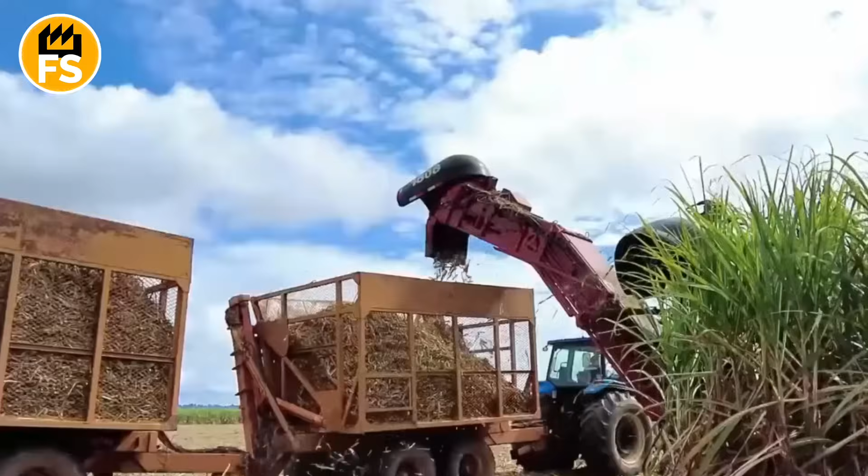Trucks are the most common option in Thailand. Special open platforms or beds with high sides allow transporting large volumes of cane. Buggies or tractors with trailers are often used for short distances, from field to loading point. In some regions where there's appropriate infrastructure, cane is transported by rail cars. This is efficient for large volumes and long distances, but less flexible than motor transport.

Water transport is a rare but possible option in areas with canals or rivers. It's used mainly for export or movement between regions. Cane is often not chopped in the field, but transported in whole stems. They're laid horizontally, densely, to minimize losses. At the factory, chopping, pressing, and juice extraction already occur.

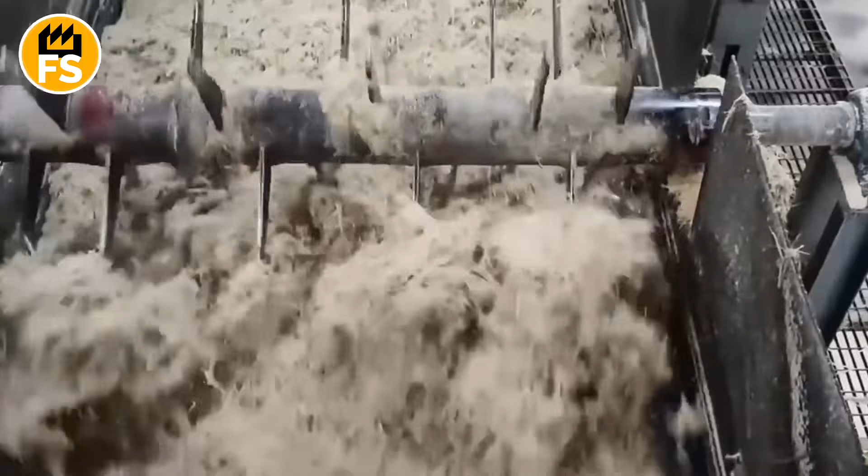Large agricultural enterprises use automated loading systems that speed up the process and reduce losses. In smaller ones, work is still done manually or with simple mechanisms. When trucks with sugarcane arrive at the factory, the technological process begins that transforms the green plant into an innovative material, polylactide. This is a complex but fascinating journey where agricultural biomass becomes part of the ecological future.

Before the cane enters processing, it's checked for sucrose content. Samples are taken from each batch to determine how suitable it is for production. Then the stems are cleaned of leaves and foreign impurities, manually or mechanically. Then our cane needs to be chopped. For this, the stems pass through mechanical crushers. These are large rollers or rotary machines with sharp blades that cut the stems into small fragments. The goal is to maximally open the cellular structure to ease juice extraction.

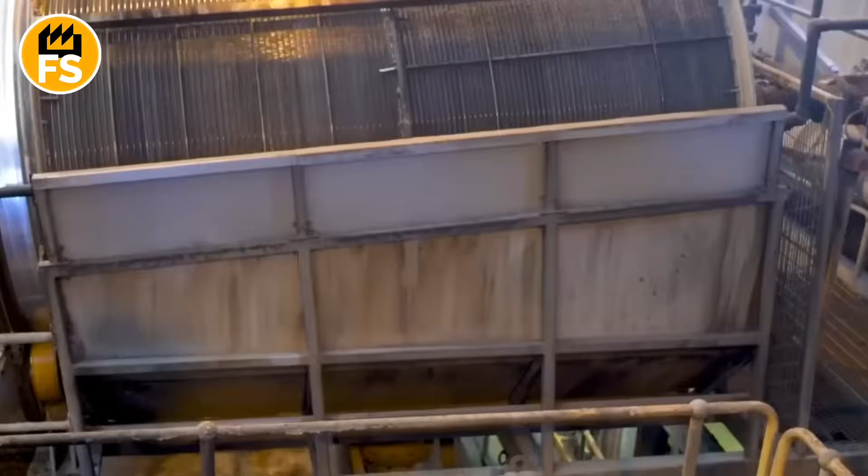The chopped cane is pressed in special rollers. Under high pressure, sweet juice rich in sucrose flows out. This juice is collected in reservoirs. The juice undergoes filtration to remove impurities, and then is heated for concentration. Next, a process similar to brewing kvass or yogurt is launched. Special bacteria are added that transform sugar into lactic acid. It's like when microbes turn grape juice into wine. Only here it's not alcohol that comes out, but acid. This process is called fermentation.

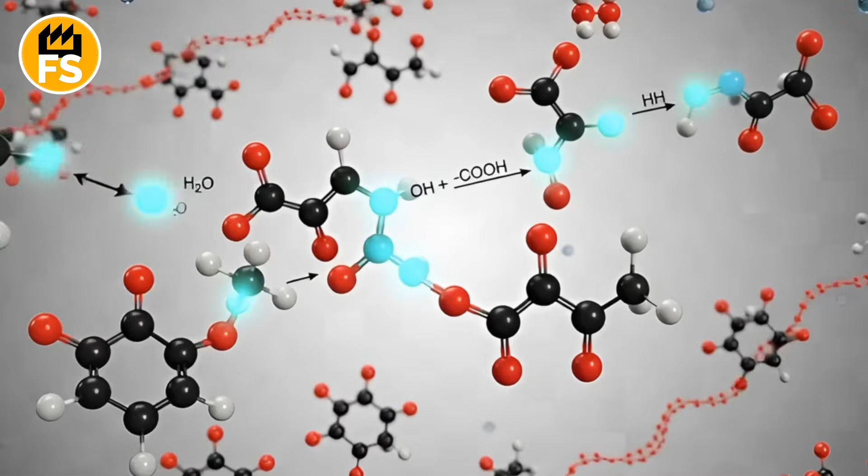It occurs in large tanks, bioreactors. There, everything is controlled: temperature, acidity, how many bacteria are there, so they work properly and don't slack off. Lactic acid is the key ingredient for creating bioplastic. It has properties that allow transforming it into a polymer. The lactic acid is purified and subjected to polymerization, a chemical process in which molecules connect into long chains.

The result is polylactide, a thermoplastic polymer that looks like granules or threads. These granules or threads are the basis for producing packaging, tableware, textiles, 3D printing filaments, and other products. Polylactide has high transparency, strength, and heat resistance, making it an ideal substitute for traditional plastic.

Polylactide granules are poured into special machines, extruders or thermopresses. There, they're heated to the required temperature until they become a viscous mass. The hot mass is passed through forms or dies. For packaging and bags, the extrusion method is used, that is, pulling hot polymer into long ribbons or film. Cups, containers, spoons, and so on are made by filling corresponding forms with polymer under pressure.

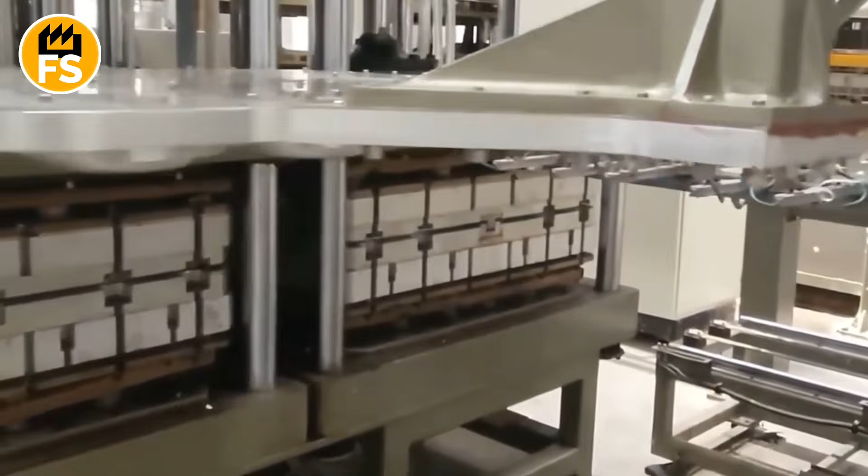To create more complex shapes, like coffee lids, heated film is pressed to the form with a press. As soon as the product is formed, it's quickly cooled, with water, air, or special cooling plates. This is needed so the material hardens and doesn't deform. Finished products are trimmed, polished if needed, checked for quality, and packed for delivery.

Before packing, each product undergoes visual inspection or automatic checking for defects, cracks, deformations, irregularities. In large productions, this is done by robotic systems with cameras and sensors. Defective products are often remelted, since polylactide allows reuse without quality loss. After final cooling, polylactide products, still warm from machine touch, set out on their last journey, to the packing line. Here, everything works smoothly. Mechanical arms carefully stack cups in perfect stacks, 50 in each.

Product groups are wrapped in biodegradable film or cardboard boxes. Packaging can also be made of polylactide. That is, the product and its wrapper are made from the same material, which simplifies recycling. Afterward, labels are applied with information: polylactide type, production date, batch, disposal instructions. Finished boxes with products are stacked on pallets, wrapped with stretch film, which is often also bio, and sent to warehouses or to customers. Storage temperature is room temperature, but without excessive humidity, so polylactide doesn't start decomposing prematurely.

Green packaging is no longer just fashion, but a demand of the times. Videos about plastic harm get millions of views, and brands are looking for alternatives that don't harm the environment. Polylactide from cane is one of the most promising options. After all, cane grows quickly, and the production process doesn't require crazy resources.

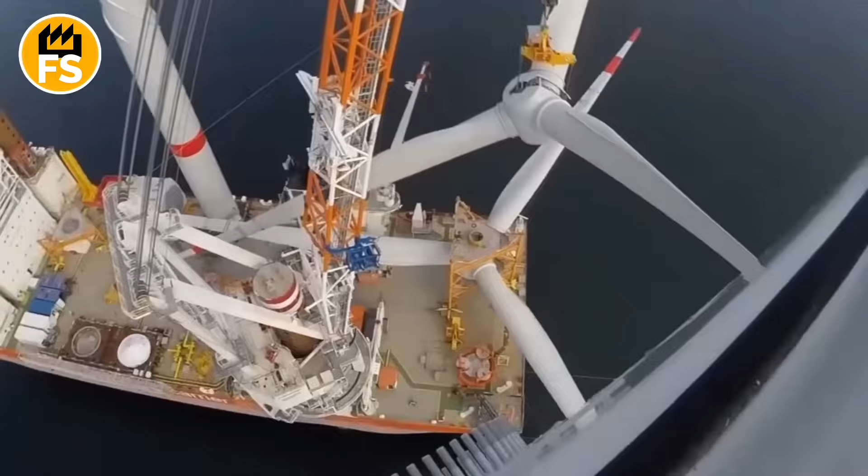Every year, over 80,000 wind turbines are installed worldwide. But few people know that each one hides a true engineering masterpiece inside: a blade over 300 feet long that can withstand hurricane-force winds and operate for decades. How do you create a structure so light it can be lifted by a crane, yet so strong it won't break even at rotational speeds exceeding 180 miles per hour?

From glass and carbon fiber to vacuum resin infusion, the process of manufacturing wind turbine blades resembles precision surgery on a spacecraft scale. Stick around till the end, and you'll discover why these giant wings have become the symbol of a new energy revolution.

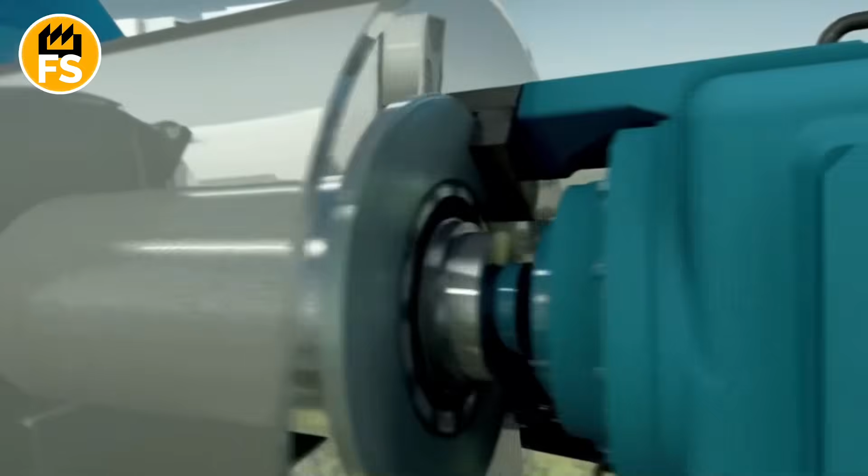Modern megawatt-class turbine blades range from 196 feet to 262 feet in length, and for offshore projects can exceed 360 feet. Why such size? A wind generator's power output is directly proportional to the square of blade length. A longer blade captures a larger wind area, increasing efficiency and consequently, project profitability.

However, with increasing size comes a cubic increase in mass. If you simply scale up a blade, its weight becomes unacceptable and gravitational and inertial loads become destructive. So the key challenge is maintaining low weight with colossal strength.

To solve the weight problem, modern manufacturers have almost completely abandoned traditional metals in favor of advanced composite materials. Fiberglass is the primary material. It's relatively cheap, strong, has excellent fatigue resistance, and provides necessary stiffness. Fiberglass cloth forms the outer shell and most of the internal structure.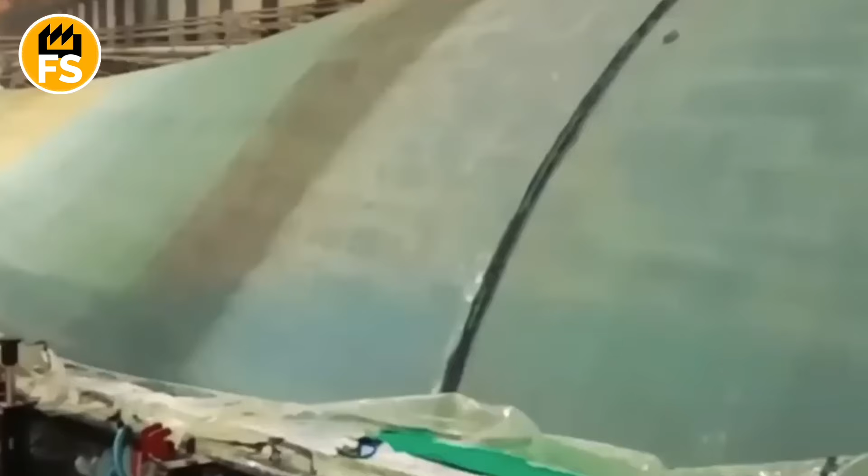For the longest and most powerful blades, carbon fiber is indispensable. It's twice as light and several times stronger than fiberglass. It's strategically used in the most heavily loaded zones, in the longitudinal beams called spar caps that run the entire length of the blade and are responsible for its structural integrity.

The fibers are impregnated with epoxy or polyester resins, which, when cured, bind the fibers into a single, extremely strong monolith. This is the heart of the process. To create sandwich structures that give the blade volume and stiffness at minimum weight, analogous to honeycombs, lightweight core materials are used, such as balsa wood or specialized polymer foams.

Manufacturing a blade is a multi-month process that requires surgical precision, even though it takes place in massive facilities. The first step is creating a giant mold, or matrix. This typically consists of two massive halves made of durable composites or steel. The mold must perfectly replicate the complex aerodynamic profile of the future blade. Profile accuracy is critical for aerodynamic efficiency and noise minimization.

Spar caps are essentially the blade's spine. At this stage, strips of carbon fiber or fiberglass are laid down. If the blade is very large, this process is often fully automated. Robotic systems precisely lay fiber layers into special grooves in the mold. This part is the thickest and bears the main bending loads.

The next step is laying fiberglass layers that form the blade's outer shell, as well as core material blocks. Fibers are typically laid by hand by experienced technicians, or using automated fiber placement to ensure proper fiber orientation that will resist predicted loads.

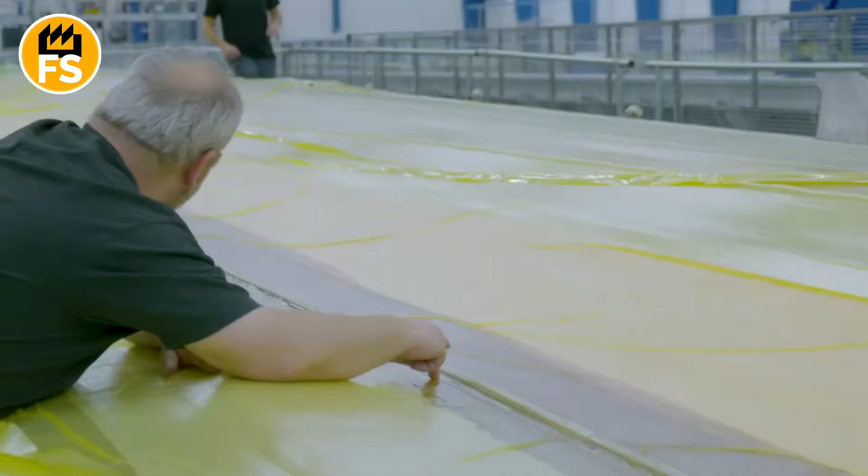After laying all the dry layers, the mold is closed and a deep vacuum is created inside. Resin, epoxy or polyester, is introduced into the mold, and vacuum pressure uniformly and completely impregnates all the fibers, displacing air and ensuring maximum density and strength. This process allows manufacturing large, nearly void-free structures with precisely controlled fiber-to-resin ratios.

The resin-filled blade is placed in special ovens or left in the mold under climate-controlled conditions. Heat initiates the polymerization process, during which liquid resin transforms into a solid, strong polymer. This process is lengthy and requires constant temperature control along the entire blade length to avoid internal stresses. After curing, the blades are removed from the mold.

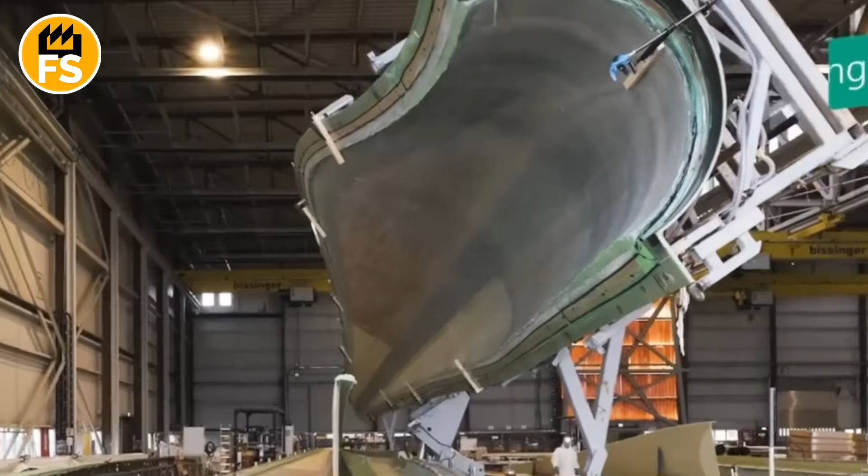The two blade halves, upper and lower, are joined together using special adhesive and additional composite layers. This is one of the most complex stages as it requires perfect alignment over dozens of feet. The root section is where the blade attaches to the turbine nacelle. Powerful steel or composite bushings are embedded here that will withstand enormous loads during rotation and transmit torque.

After assembly, the blade is sanded and then coated with special protective coatings. These coatings, particularly on the leading edge, are vital for protecting composite material from erosion caused by rain, hail, dust, and insects, which act like sandblasting at high blade tip speeds. American manufacturers like GE Renewable Energy and TPI Composites pay special attention to quality and innovation to guarantee blade reliability for 20 or even 25 years of operation.

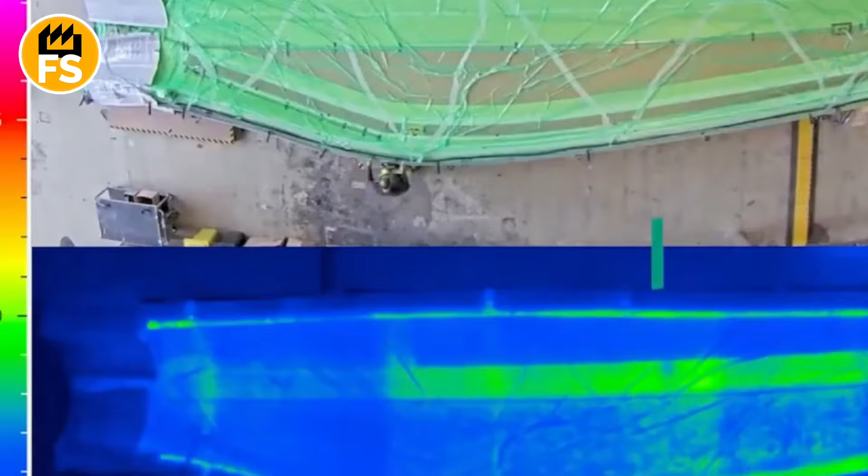No blade leaves the factory without thorough inspection, since internal defects like air pockets or poor resin impregnation can lead to catastrophic failure. Ultrasonic scanning detects internal defects, voids, and composite delamination. Thermography measures thermal signatures to identify areas with varying density, such as defective bonding.

Each new blade model undergoes extreme testing in specialized laboratories. The blade is bent to its strength limit, simulating the strongest wind loads and loads from its own weight to ensure it won't break. Then the blade is forcibly bent forward and backward, up and down millions of times, simulating decades of operation to test material fatigue resistance.

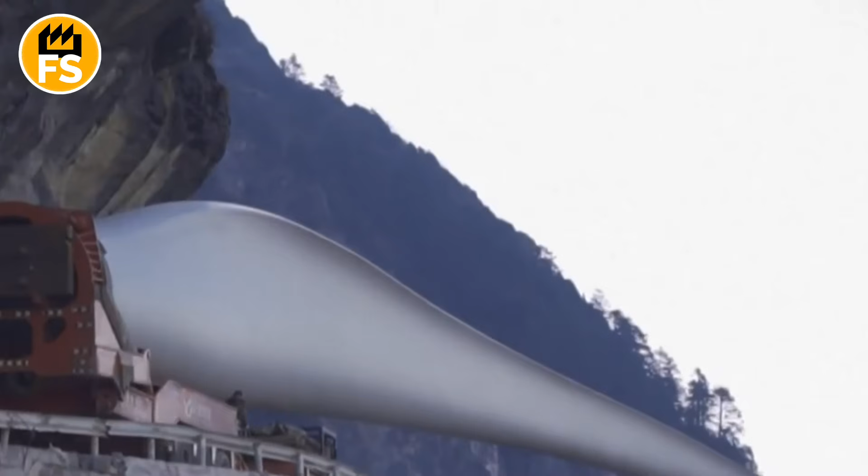After manufacturing comes another engineering challenge: logistics. Transporting a blade over 260 feet from the factory, often located in interior US states, to the installation site requires special low-bed semi-trailers that can rotate the blade around corners and lift it to avoid collisions with infrastructure. It's a unique logistical dance that often requires temporary road closures. Transporting blades is a logistical nightmare. Blade length can easily exceed the wingspan of a Boeing 747.

To transport such structures on US roads, special extended semi-trailers are used that can lift, rotate, and tilt the blade at intersections and in mountains. This requires temporary road closures, removal of road signs, and even traffic lights.

The US continues investing in developing even longer, lighter, and stronger blades, researching thermoplastic materials for better recyclability, and segmented designs to simplify logistics. This ensures that the engineering marvel born in factories will remain a key element in achieving energy security and sustainability.

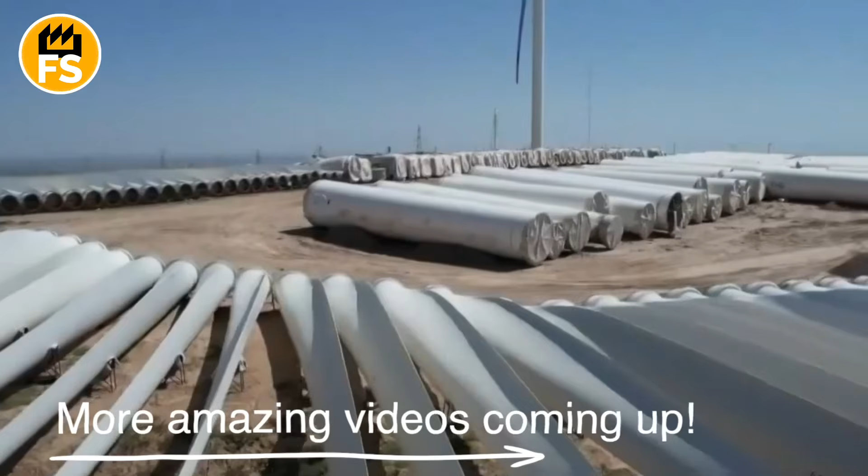Some blades, especially older ones that have already served their term, instead of being recycled, are buried in specialized landfills in sparsely populated states like Wyoming. Due to their volume and composite material, fiberglass that doesn't decompose, they can occupy significant areas, becoming museums of green energy.

The tips of the longest blades can reach rotational speeds of 180 miles per hour. Though they don't exceed the speed of sound, this requires the blade tip to be perfectly designed and protected from erosion. An ordinary raindrop hitting the blade at such speed has destructive force similar to sandblasting. This forces manufacturers to develop high-tech but expensive protective coatings for blade leading edges.

Engineers in the US are developing smart blades that can change their shape or have segmented tips. This allows the turbine to adapt to changing wind speeds and thus increase efficiency and reduce loads.

Every single second, over 100 tons of new trash gets created around the world. Think about it. While you're watching this video, an entire truckload of waste appears on our planet. Where does it all end up? For years, the answer was simple: China. That's where Europe, America, and Japan shipped millions of tons of used bottles, paper, and scrap metal. But one day, China said, "That's enough." And suddenly, the world faced a garbage meltdown.

But here's the mystery. Why would a country that banned importing other people's trash start searching for it just a few years later? Stick around till the end. You'll discover the secret that flipped the global recycling industry upside down.

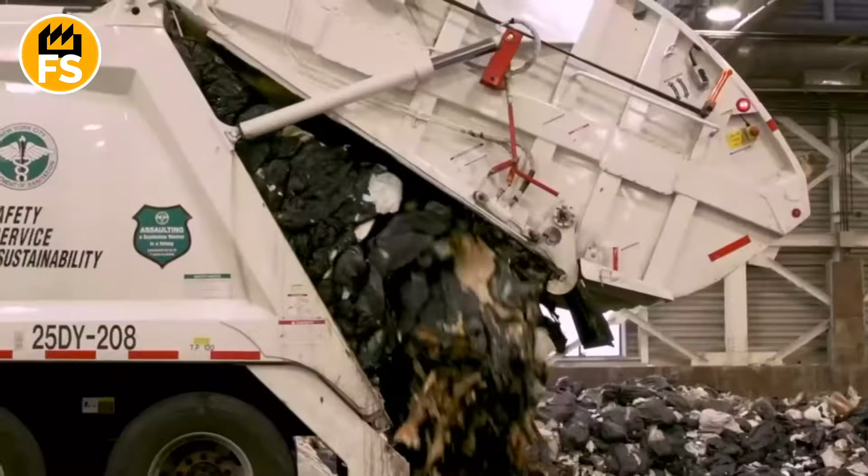For many, many years, the entire world, especially wealthy countries in Europe, America, and Japan, got comfortable with a very convenient setup. They'd collect their trash, old plastic, paper, scrap metal, and simply ship it off to China. Massive container ships sailed across the oceans, loaded with tons of used soda bottles, old newspapers, and broken toys. China was like the world's global trash can. But not just a can. It was also a massive recycling operation.

Chinese factories would take this waste, sort it, process it, and turn it into new products that they'd sell right back around the world. It was incredibly profitable for China. They got cheap raw materials and created jobs. And for other countries, it was perfect. They got rid of their garbage problem for relatively little money. Everybody was happy, right? Well, almost.

But then, around 2018, China said, "Enough." Imagine a huge meeting of Chinese officials where the decision rang out: "We're done accepting other people's trash." They called this policy, very characteristically, National Sword. It was like if your neighbor, whose garage you'd been dumping your junk in for years, suddenly said, "That's it, take it all back. My garage is full and I'm sick of this." And that's when real chaos erupted.

Countries that had been carelessly shipping their waste to China for years suddenly found themselves with millions of tons of garbage with nowhere to go. Picture this. Warehouses across Europe and America started filling up with mountains of plastic and paper that were supposed to sail to China, but now had no destination. It was a genuine shock to their recycling industry. What were they supposed to do with all this trash? Dump it in the Pacific Ocean? Toss it in deserts like in post-apocalyptic movies? Of course not, but the panic was massive.

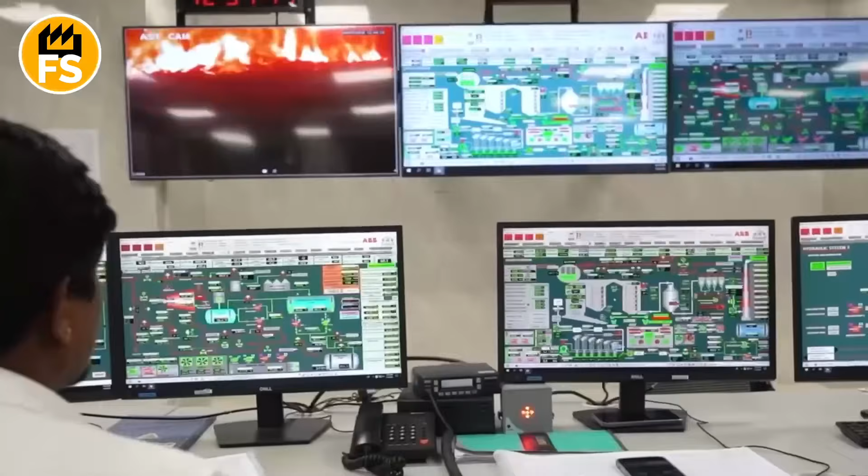Some countries started burning waste in incinerators, which isn't great for the environment since it pollutes the air. Others scrambled to find new trash cans in Southeast Asia, Vietnam, Malaysia, Indonesia. But these countries quickly started pushing back too, because they didn't want to become the world's dumping grounds either.

But here's where it gets really interesting. While the world frantically searched for somewhere to shove their plastic mountains, China started feeling a strange hunger. A hunger for plastic, a hunger for waste paper, a hunger for scrap metal. Seems impossible, right? A country that generates the most trash in the world suddenly experiencing a shortage of it? It's like a millionaire who suddenly went broke and is now searching for loose change under the couch cushions.

The thing is, Chinese industry had gotten hooked on this imported high. Recycling plants, of which there were, to put it mildly, plenty in the Middle Kingdom, had gotten used to working with cheap, abundant, though not always quality, imported waste.

Imagine a huge factory that processes tons of plastic bottles from Germany or the US every day. Its conveyor belts ran non-stop. Its workers knew their job. Its owners counted their profits. And suddenly, bam! The tap of imported raw materials got turned off.

National Sword didn't just cut off imports. It left this entire massive industry without its usual food supply. Factories stood idle, capacity sat unused, and business owners pulled their hair out. But why couldn't they just switch to their own Chinese garbage? After all, there are billions of tons of it, right? That's where the devil's in the details. The problem isn't the absence of trash altogether, but the absence of quality, sorted, clean raw materials.

First, even what gets sorted often doesn't meet the cleanliness standards required for recycling. Imagine a plastic bottle you tossed in the right container, but it was poorly washed and still had yogurt residue inside. Or a pizza box soaked with grease. Things like this, if there are too many of them, can ruin an entire batch of raw materials, making it unsuitable for recycling. Recycling plants that previously worked with more or less standardized imported plastic that had already gone through initial sorting abroad suddenly faced Chinese reality, a mixture that requires additional, expensive cleaning stages, or simply gets rejected.

Second, logistics. Collecting billions of tons of trash is one thing, but collecting it in such a way that it reaches recycling plants as clean, sorted raw materials that can be economically viable to recycle, that's a completely different story. In many areas of China, especially in smaller cities and rural areas, the secondary raw material collection system is still very primitive. There, trash is still collected haphazardly, and sorting often happens right at the dump site, by hand, which hardly guarantees high quality.

But there's another interesting angle here. China is a country that's constantly trying to upgrade itself, to become a leader in everything. And with trash recycling, it's the same story. After National Sword, they decided, okay, if we can't import, we'll build the world's best system ourselves. And they started building, modernizing, investing. New, modern, high-tech recycling plants appeared. They're equipped with the latest equipment, capable of processing massive volumes of secondary raw materials.

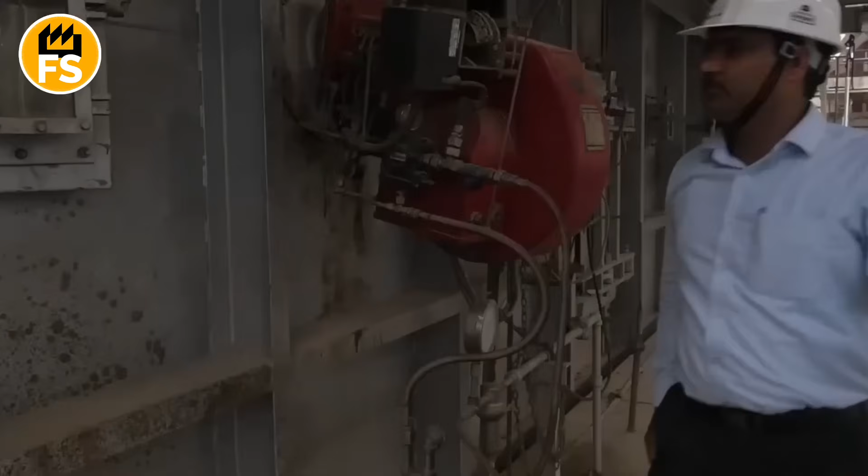But they need these raw materials. Clean, quality, preferably pre-sorted. And that's where the paradox emerges. There are plants, there's technology, there's the will to recycle, but there's not enough of the right trash. Picture a giant gleaming factory where robots work, but the conveyor belts move sluggishly because trucks haven't brought enough quality plastic. Or they brought it, but it's so contaminated that it has to be sent to the landfill instead of being recycled. It's like building a luxury restaurant with the best chefs, but having a shortage of fresh ingredients.

This hunger for trash isn't just an economic problem, it's also a driver for further change. It's forcing China to accelerate reforms in waste management. The government is putting even more pressure on cities to improve their waste separation and sorting systems, educate the public, and implement fines for improper sorting. New logistics chains are being created for efficient collection and transportation of sorted secondary raw materials to recycling plants.

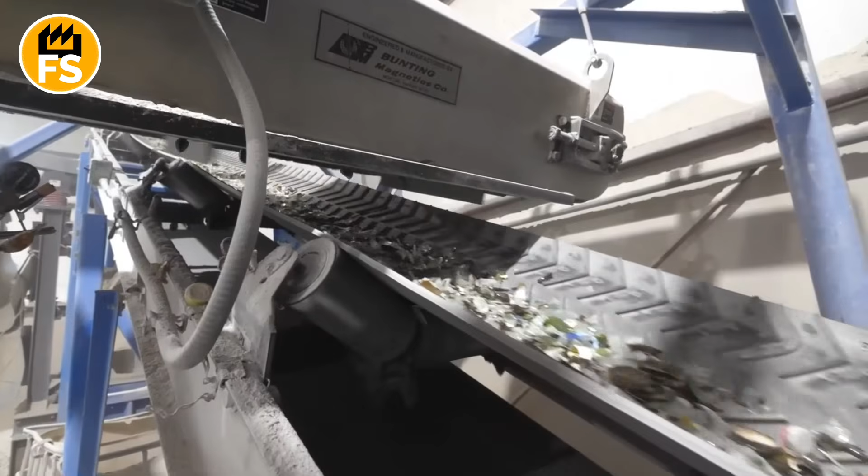Systems based on artificial intelligence and robotics are being developed for more accurate and efficient trash sorting. Imagine sorting robots analyzing every piece of plastic, determining its type and cleanliness. China aims not only to recycle, but also to use recycled materials in its own production, thereby closing the circular economy loop. This means that a system that previously relied on external sources of raw materials now has to completely reorient itself to internal, more finicky sources.

And this trash hunger paradoxically pushes China to finally build a truly efficient and environmentally responsible waste management system. It's like a dragon that created a problem for itself just to heroically solve it later. And who knows? Maybe in a few years, China will be not only the world's biggest trash producer, but also its biggest and most efficient recycler. That's the tangled but fascinating trash story from the Middle Kingdom.